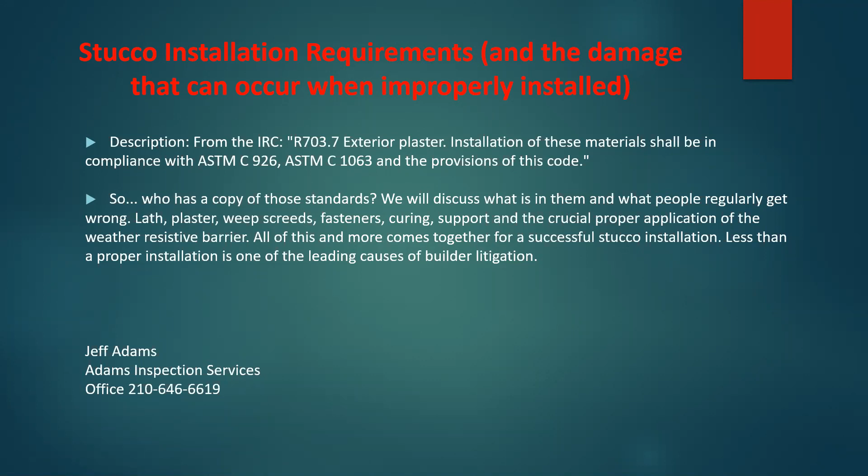There's 4 main types of stucco that you're going to see around, and that's your hard coat stucco. It's generally a 2 to 3 coat stucco, depending on what the substrate is behind it. You can occasionally find what's called a Western 1 coat. It is a manufactured product. It doesn't really meet any type of code or standards as a 1 coat, but there is a deal out there using it. I found that being used in the New Braunfels area north of San Antonio. In Central Texas it's not used that much on residential, more on commercial. Other areas it was used quite a bit.

And then there's a modified stucco, which could just run the gamut. It might have a styrofoam board backing like what you'd see with EIFS, but then they put a hard coat stucco over it. They may put a 1 coat or 2 coat stucco application, and then a polymer top coat, such as Dryvit or what have you, over the top of that.

The manufactured, what I like to call just the lick and stick stone veneer that goes straight over the stucco. And then there's a new one coming up that I just really hate. Several builders are using it. I just call it a faux stucco. It's made, it's an LP product. It goes over their panel, which originally started as their smart panel, a smart siding, and now it's that strand board or whatever they call it, they're putting it over. It's taped at the seams, and then they put a polymer coat over the top of it, and it's just got all kinds of problems. That product can't touch the masonry veneer at the wainscot, which it does. It can't touch the slab and so forth, and we're not going to go into that, but there's just all kinds of issues with the install with that as well.

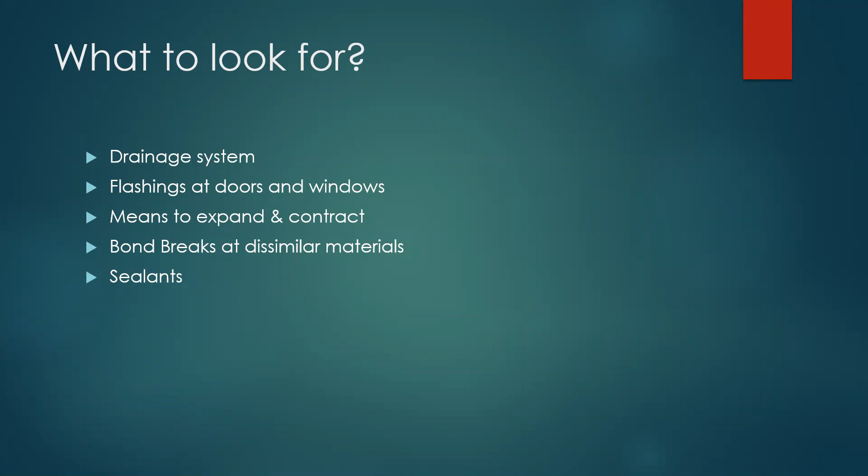Elastomeric paints - every builder around says, well, we paint our house with elastomeric paints. So they're basically putting a condom over their house. It does not breathe, and it typically will rot that out prematurely. I might have some pictures of a house that was done with partial elastomeric, and I'll have to look and see if it's in here.

It traps moisture. I go to these houses a few years old, there's a big water balloon sticking out of the wall. I can pop it with a knife and the water comes pouring out. It traps moisture in there because it's not going to make a perfect seal at doors or windows. Elastomeric paints just cannot be used in lieu of proper flashing details.

In general, it's got issues with the perm rating, and down here I just don't feel it has enough permeability. I'd rather use a name brand product - this is not an endorsement for Dryvit by any means, or several others - but a name brand product with a polymer top coat has a much better perm rating and allows the house to breathe.

Obviously, we've sized our ACs properly to help take care of some of the vapor. Hold on, what'd you just say? Whoa, I know, but I didn't hear you correctly, because I know you didn't just say we've sized our ACs properly.

No, we should be sizing our ACs properly. A good AC guy will, because we have to accommodate for water vapor in our houses down here. Other areas, elastomeric is probably going to be all right, but in this region of the state, we need to breathe. Everything is about breathing down here, and we have to allow our houses to breathe. Ideally, our AC should be sized and designed properly for the region it's put in to help accommodate for it. And I know it's not.

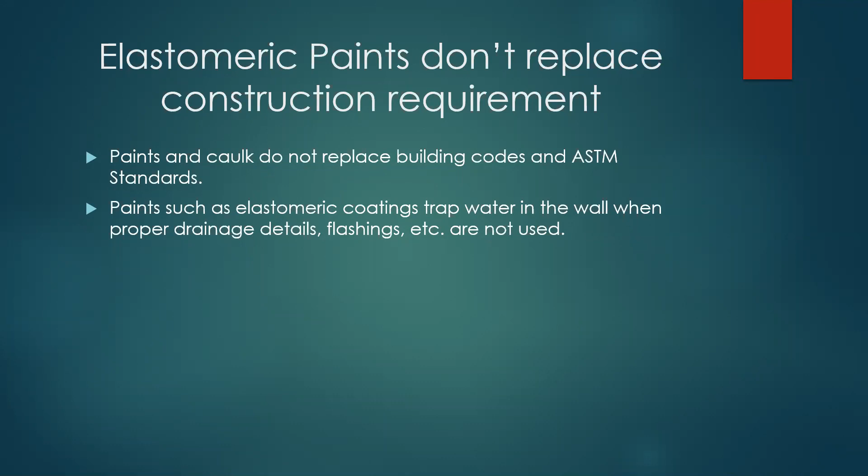I know Jason and I talk about this all the time, about all the returns being undersized and improperly ducted, and rooms with no means of return, whether it's a jumper duct or some type of bypass. I just did one yesterday, 4 supply vents into a master bedroom and no return on a 2-story, no way to get it in there. So you're going to have to cut a hole through the wall and put in a pass-through grill. You can't have 4 supplies into a room like this and no return. You're going to have to cut 12, 13 inches off the bottom of the door to make this work.

So here's the standards, a good little cheat sheet. I actually print this out because I can't always remember all this stuff, although I'm pretty good at remembering these codes every now and then - I need a little bit of help. So it gets into a little bit with the IRC.

We start with the flashings, exterior plaster. We get into lath, a little more into plaster, your weep screed, which is defined by a 3.5-inch flashing detail. A casing bead is not a weep screed - the holes, as you're going to see, are not designed to let water out. I'll show you how a weep screed is supposed to work and how it actually works.

Obviously our WRBs have to be good weather-resistant barriers. We keep changing the name - moisture barrier, and so forth - and now the newest term they like to use is water-resistive barrier. So your WRB's got to be in there.

What about that cheap perforated builder wrap? That's good stuff, right? I'm a big fan of Tyvek. When you look at these house wraps, I tell people everything you ever heard about house wraps being horrible is true, with the exception of Tyvek. The engineering that goes into it is different. Some of this other stuff that's off-labeled, labeled in the builder's name, is no more than a woven feed sack - there's holes in it everywhere. It's not doing anything to stop the water at all, much less vapor. It's just not doing anything.

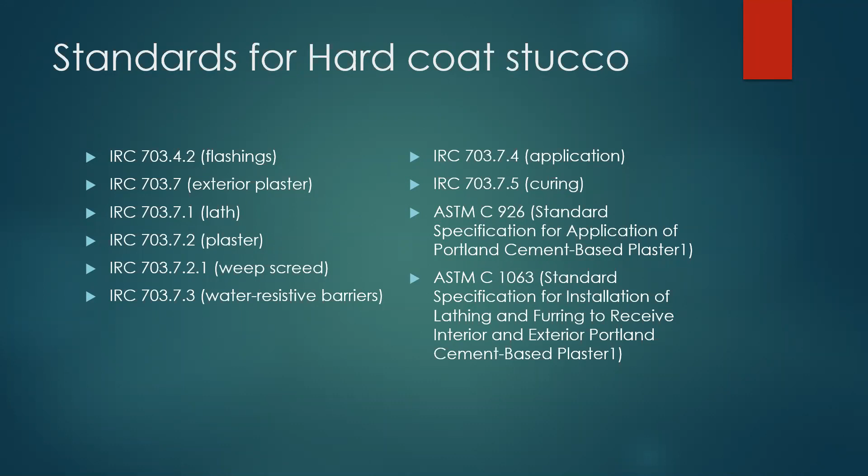It's usually very subtle wording in there that gets changed, but every few years, obviously, they become like the code, and there's enough changes where you have to buy new chapters. I split them with some guys - for an extra $10, you get 3 copies. So there's 3 of us together, and we split them up like that, and it's pretty cheap to buy them.

Flashing - so this one is a little bit quite interesting. When you start looking at the flashing, you start looking at the ASTM standards, we can't confuse window flashing for stucco flashing. Those are 2 separate codes.

So all the time you're going to see the lick and stick flashing details up there, and that does meet the ASTM standards. That does not meet the code requirements for stucco. Stucco still requires its own flashing details you're going to see.

Under 703.4.2, and they keep bouncing that around. It was 703.8, it was 703.5. Right now I think it's still at 703.4.2.

Intersections of chimneys or other masonry constructions with frame or stucco walls with projecting lips on both sides under the stucco copings. So when you start looking at all these stucco houses with decorative bands, they are requiring flashing details in the code. So it's not just the ASTM standards, it's also in the code when you start getting these decorative bands. At least in the South Central Texas region, you're going to see here in a little bit, almost all the decorative bands are being done wrong.

That's why a lot of other stucco experts feel decorative bands are a horrible idea. I think decorative bands are fine when they're done right, but I would agree that decorative bands are a horrible idea with the way that we tend to build them in this region of the state.

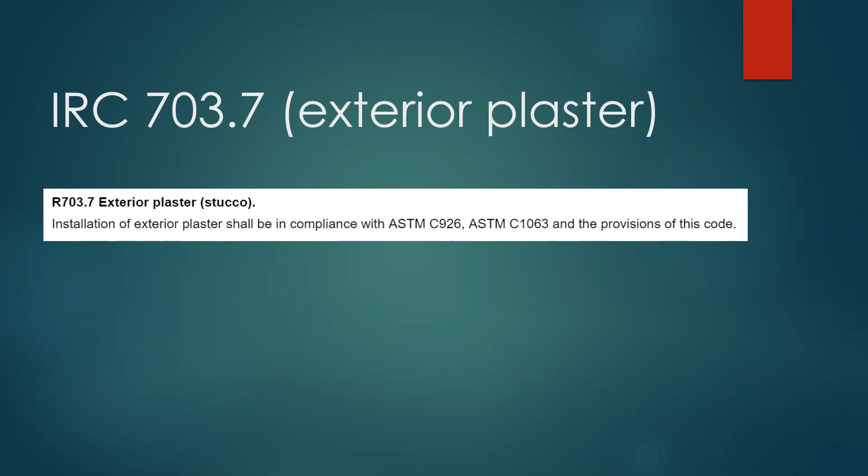Exactly how it has to be attached, the attachment. I don't get as concerned. It's kind of like anything else. If there's some areas that are randomly improperly attached, it's not going to hurt anything. Whole large sections, obviously it will. It causes it to buckle under its own weight in some instances, causing a lot of cracking and damage that should not be occurring, and that's because the lath is pulling loose.

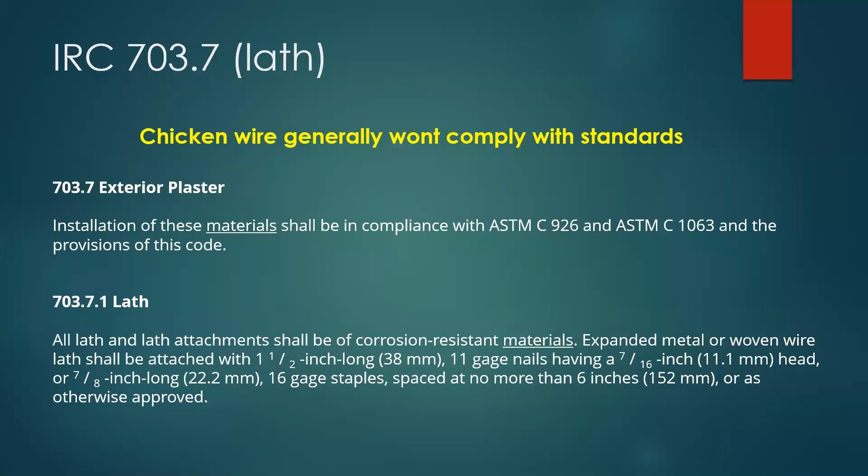And so there's your standards under 703.7.2. It gives you standards: no less than 3 coats over metal lath or wire, shall be not less than 2 coats when applied over masonry, concrete, pressure preservative treated wood, or decay resistant wood, or gypsum.

You still will see some gypsum. It's still used. I'm not a big fan of gypsum, but as long as it meets those ASTM standards with a waxy coating on there, it does suffice to be used, and it does also equal one of your WRBs. It can be used.

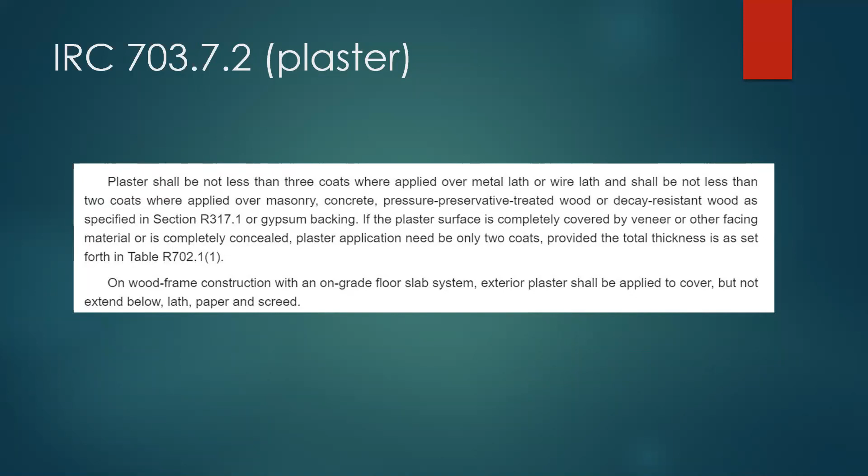The reason I don't like it is those staples do not have a good pull out. They can pull back out much easier than they can going through OSB or plywood or anything like that. Where it obviously hits the studs, not a big issue. If it's put on over a plywood substrate and these long enough staples, then it's kind of irrelevant. I still prefer Tyvek or even Zip. Zip is a big one, and you're going to see a lot of Zip stuff coming up.

The weep screed, this is a big one. So weep screed has been in there, and you can go all the way back to CABO and Southern Building Code. It didn't go into this kind of detail, but like I tell people, weep screed has been around in the code since Christ was in diapers. It is literally that old.

The ASTM standards, I've been doing this 30 years. It's been in there. Back then we used CABO in the Southern Building Code. It just referenced a screed. It didn't go into the 3.5-inch flashing detail like it does now. But when you got to the ASTM standards, it still defined the screed as what we have now.

So the idea of the weep screed has not changed much over the last 30 years and possibly even over the last 40 years, even though you could not even buy it in the San Antonio market here until about, I don't know, it started becoming available around 5-6 years ago. Prior to that, you had to special order it and wait for it to come in. They didn't even stock it at the supply houses here. Oh, they still don't at Home Depot.

Go back to that last slide real quick, Jeff. And I can guarantee you one thing we never see that we just... if you use your back arrow, it'll go. There we go. Hey, what about this?

The weep screed shall be placed not less than 4 inches above the earth. We are normally okay at that, but think about stucco on back porches. I've seen it on porches where it's just going to get hammered with water. What does the stucco do at a porch? It goes all the way down to the concrete. Yep, and we're going to cover that. Drain? How's that going to drain?

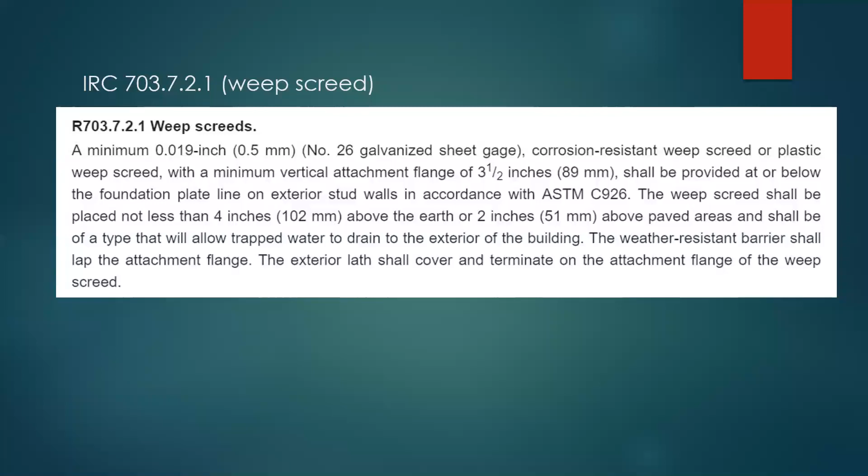Here's one of the other big issues too that you see - these outdoor kitchens. Some of the builders have gotten smart and started using CMU block to build these and stucco them, but the ones doing wood are just putting them straight down on the porch. The stucco comes down to it, and within a few years these outdoor kitchens are completely rotted out because it leaks up around the granite countertop. It runs down the backside of the stucco, gets the OSB wet, pops it all loose, gets down to the toe plate, and it just completely rotted out a $30,000 outdoor kitchen.

The water resistant barriers - again, stucco is one of these that does need 2 layers of moisture barrier. I personally feel that the way the engineer submitted the moisture barrier has to be done at the sill flashings or pan flashings is completely wrong. The builders I work with, when I write repair protocols, I've worked with Stephen Cook Engineering and stuff on some stucco projects, and I actually draw it a little bit differently. I don't let my sill flashings terminate between the layers. I want to keep as much water on that second layer of moisture barrier as humanly possible. It just prevents us from having issues down the road.

It's no different than a tile roof - if you can keep 99% of the water on top of that tile rather than getting underneath it, you're going to have a much better roof structure. At one point I was doing a mediation, and one of the tile manufacturers testified that their barrel tile was all right to have as much as 30% of the water underneath it. I almost died, I went, oh my God. Very difficult - if we let 30% of our water get between our moisture barriers, we're going to have problems. We need to make sure we keep as much water up on those moisture barriers that gets behind the plaster as humanly possible.

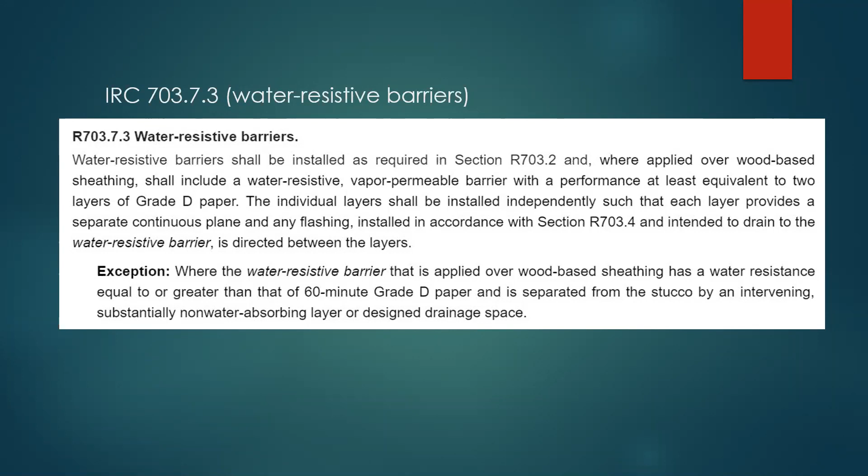The application - each coat shall be kept in a moist condition for at least 48 hours. I know every one of you guys out there doing inspections drive by and see these guys out there with a garden hose misting their stucco for 48 hours between the coats.

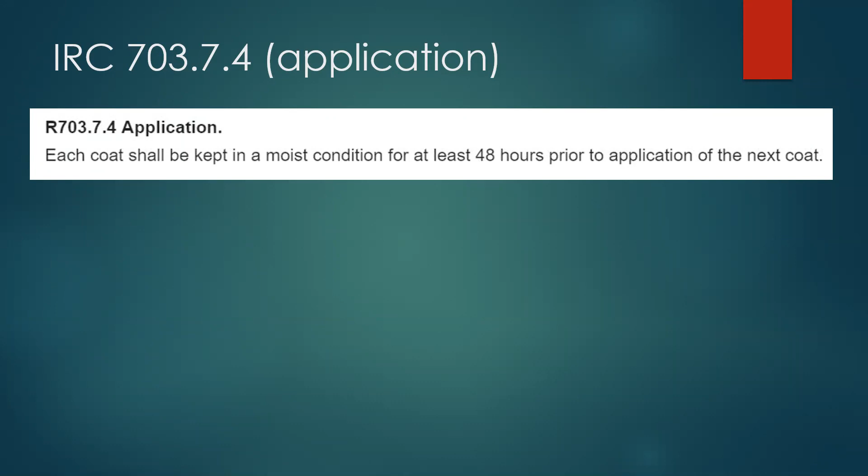That's part of what's causing a lot of the cracking that you see. They're just coming back and reapplying the next coat the next day, which you're not allowed to do, and they do it anyways.

The finish coat for a 2-coat cement plaster shall not be applied sooner than 7 days after the application. They'll put up an application today and be out there putting the next application tomorrow, not allowing enough curing time, causing a lot of cracking. I see at least 2 days sometimes, but it says 7, folks. It says 7.

Occasionally they don't show up the next day because they got paid. It depends on what day it is - if it's a Monday, they'll be back on Tuesday doing it. The best thing is to have it applied at least on a Friday.

Here is your ASTM C1063, ASTM C926 standards, and here's what's really important: stucco is the only material that requires a specifier and a contract. A specifier must design the stucco with drawings and details, then a contract must be put together between the stucco applicator and the builder.

I use that in court all the time. When they always want to argue, I just tell the attorney, ask them for their stucco contract. And the other side always responds, 'what stucco contract? What are you talking about?' You got to have a stucco contract - you're applying this product with no contract.

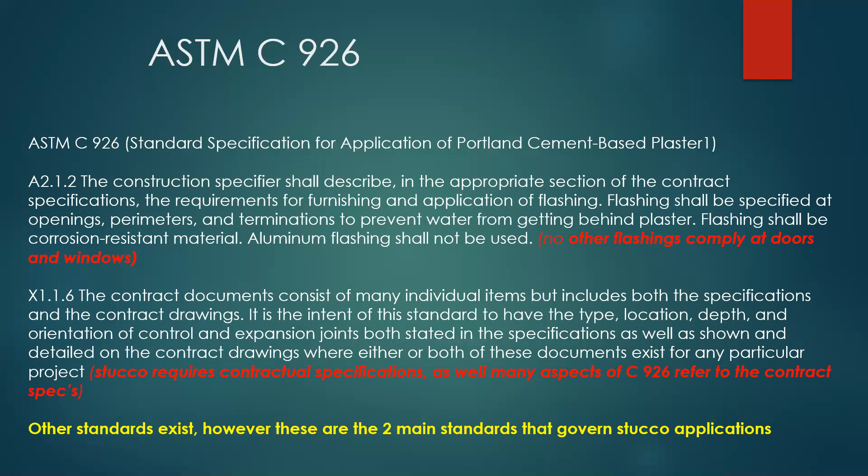So you see all these houses, and the builder or even the architect goes, 'oh, well it doesn't look good with those expansion joints there.' And I go, 'yeah, well neither does that big damn diagonal crack with water oozing out of it with green algae.' It does require expansion or control joints at every single penetration through that stucco.

Standards for the lath and furring to receive interior and exterior Portland cement. Separation shall be provided where plaster abuts dissimilar construction materials.

So again, you cannot butter that vinyl window with stucco, which they all do. It is required to have a bond break with at least a 1/4 inch gap so that it can be sealed.

Especially with these vinyl windows, as that concrete expands and contracts, it puts a lot of pressure on those vinyl windows, which are never installed properly either, causing a lot of distortion in windows that don't open and close, and a lot of egress issues. These houses get a few years old, materials expand and contract, and then we end up with windows that don't work and have egress issues on a regular basis once they get a few years old.

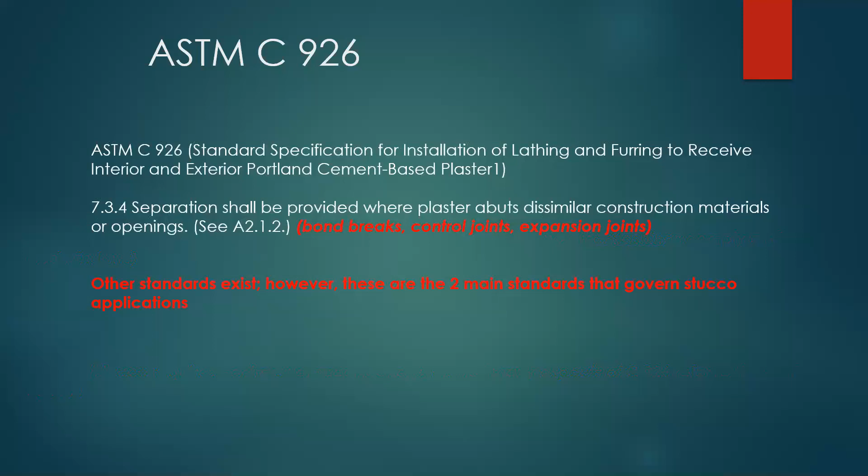I plagiarize these, I love these. This is a company called Senergy, and they've got great drawing details. This one shows you a drain mat in there, rain screen, which Tyvek has a good product. There's several really good ones out there. I like this company's product as well, their rain screen. But Senergy is a great place to go and look at some of these details.

There is talk that there's a big push to make rain screen a requirement on stucco. On one hand, I'm all for it. On the other hand, I'm thinking, well, what are we going to do by adding one more layer to this? If we can't get the layers right that we already have, adding another layer is going to make it worse.

I worked on the project with the Stinson Airport Control Tower here in San Antonio. I was the inspector for the engineering firms, as well as TxDOT and the FAA. It had a stucco wainscoting around that control tower, and with that, it had a rain screen built into it. It was a great drainage mat, and I really liked the product that was spec'd on there.

And we could not find anyone in the San Antonio market that could put it on. We had to go to Houston and bring in a commercial stucco contractor, pay him three times as much in order to do that little bitty amount of stucco around that control tower, because no one in the San Antonio market could put it on.

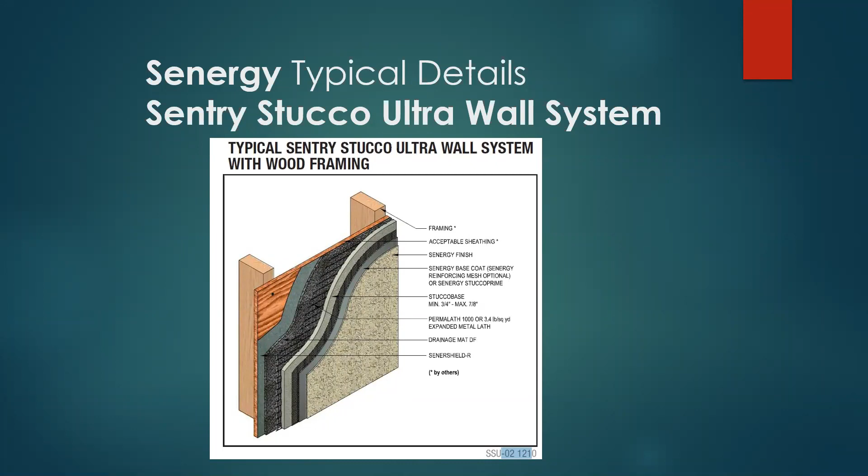This here is showing your horizontal expansion joints or control joints, how they're going to work. You've got to have them between the first floor and second floor so that it allows for that thermal expansion. You must have expansion joints installed between floors. You're going to have difference of temperature, and you're going to have different amounts of expansion and contraction.

You will often see these joints missing. Let me ask you, so what about, does it just say between floors? What about, I can just imagine a 20-foot plate in a great room. Isn't there like, is it a 10-foot max?

Yeah, there is some detail for that. And then they've also changed it. It used to be a 2-to-1 ratio between these joints. They've now changed it to 2.5-to-1 ratio. So when you see these big tall walls and they've got these expansion joints, you may have to come back, even though it doesn't have a floor there. A lot of those are going to require a horizontal expansion joint to divide that wall up even further.

Gotcha. And while we're on this, Kelly asked, when referring to flashing around windows, are you considering self-adhered flashings as acceptable behind stucco, or saying it's got to be metal to come outside of the window frame? It has to come outside the window. It specifically says to prevent water from draining behind the plaster.

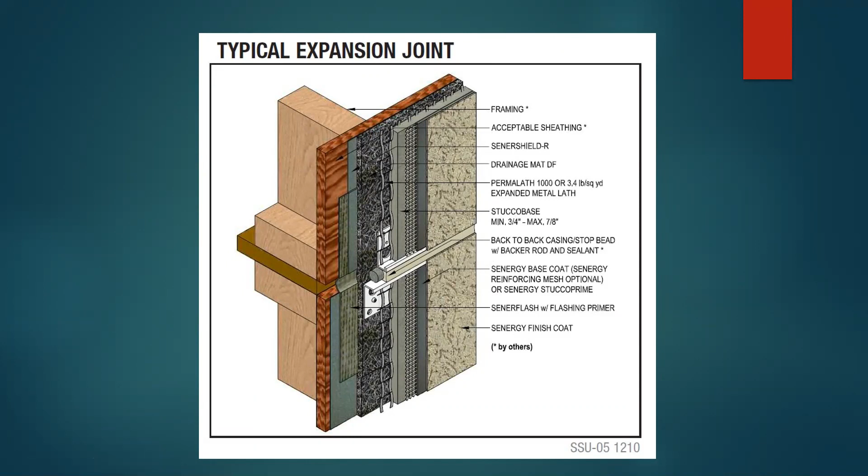Here's your bond breaks. So you're seeing a window frame, you're seeing your casing bead here. We're leaving a gap between here, okay, generally a quarter inch. You'll see that's often referred to as an embedded caulk joint, okay? So we have our casing bead here, we have our window here, we're adding our backer rod, and then here is our sealant.

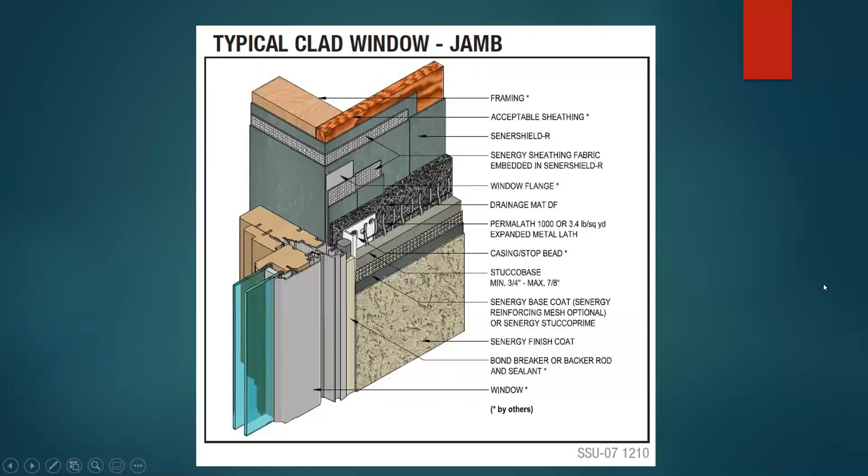And it's giving us that embedded caulk joint that allows for this expansion and contraction of dissimilar materials. And again, the idea, folks, is not to keep this stuff dry. I mean, yeah, we do want to keep it dry, but the idea is we know it's going to get wet—where's the water going to go when it does?

I love this drainage mat product. I mean, if I were going to do stucco on my own house, no brainer. Well, and they have it—I've done it twice now.

James Hardie has their own product, and then there's another company that did it. That's for James Hardie, and you can do it behind fiber cement siding. It's pretty cool, it's a great way to do it, and it adds a little more energy efficiency because you have a little bit of air movement in there to help stop that thermal bridging between the siding and the wall.

Here you can see your detail. Now this is an in-depth detail here, a lot more complicated than actually what the code requires, but I like it again. So you can see everything here. Here is your flashings—they put a drip leg on here. They ended this with a casing bead.

I would not recommend ending this with a casing bead, because it will hold moisture here. It will ice dam, it will freeze. It can end just on this flashing here, okay, and that's fine as long as we don't caulk this edge. These casing beads will hold water and they will split and so forth.

One of the other problems you have is all these guys will nail it with a staple gun too low, and you're going to see that here in a little bit, and we've just ruined all our flashing details and caused it to leak. They're leaving a gap, as you can see, and putting in an embedded caulk joint underneath here. This is a very complicated window flashing detail, it's pretty cool.

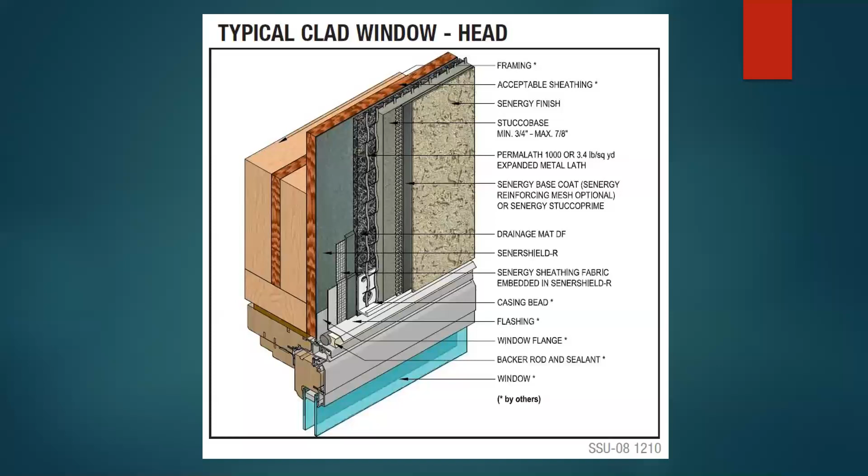I would not end it with a casing bead, but that's how they choose to do it. Down here it's not going to really hurt a whole lot, but as you start going further north, it can ice dam and split. I would never do that. There's no reason with all the other details they have there. It's just an extra detail that's not needed.

This is an exact color copy of what it shows you in the ASTM standards on how to do your deco bands, any decorative bands. We're getting this wrong, folks. Y'all watch these, your next inspections, watch these decorative bands. The other problem you have is when they do these decorative bands, you're going to see they're shooting holes all through our flashing. So even if we have good sill and head flashings, we are blowing holes through them.

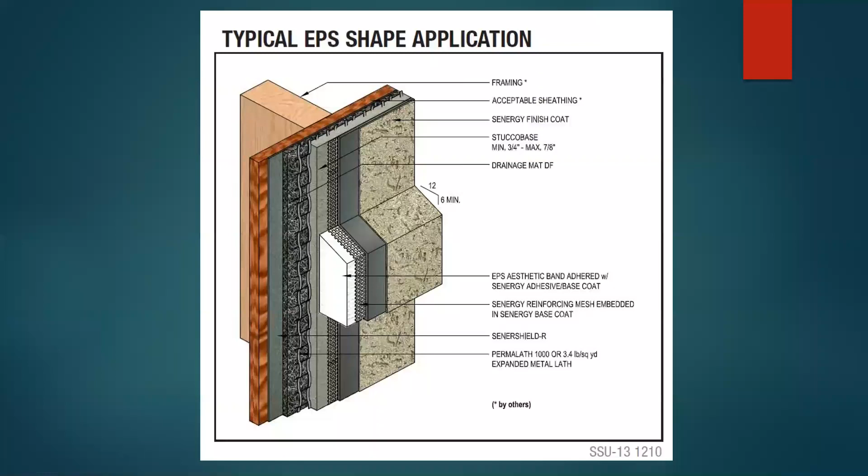This is actually going on here and going back behind the moisture barrier and has a wrap on it. And when you do this, you can see how these decorative bands are going to work just fine. They're going to work great.

Does EFS have to meet ASTM or EIFS? I call it EFS. Does EIFS have to meet ASTM C 926 as well regarding drawings and contracts?

So I know Oklahoma has had a problem with the base coat, maybe Kelly could elaborate a little bit. So basically the base coat's cheaper from one manufacturer, and then they got something from another manufacturer, and it's voiding the warranty because it's not the same product, and they're having a real problem with that in Oklahoma. And it's because, I just don't understand, the supplier doesn't know better. That's what bothers me. But this is all about saving money.

It's just like the CEO for the major home builder saying, what? I build 7,000 houses a year. Basically, I am not about to spend $200 to solve this problem, if they can save the money. But you're exactly right, some of these products are not compatible, and you have to watch that.

So there is a big issue, I guarantee you there is an ASTM standard on that. I do not know what it is. We just don't use it enough down here, except on a few commercial buildings. So whenever I do run into it, I have to fully research everything.

And then again, the manufacturers a lot of times are going to supersede some of the stuff, because every bit of the code says the manufacturer must comply with the standards and the manufacturer specification. So like I tell people, if that manufacturer tells you to take that 50-gallon water heater and lay it on its side to install it, that's how you do it. That's how they got that product approved. So you have to look, it's very specific on some of those EFS from the manufacturer.

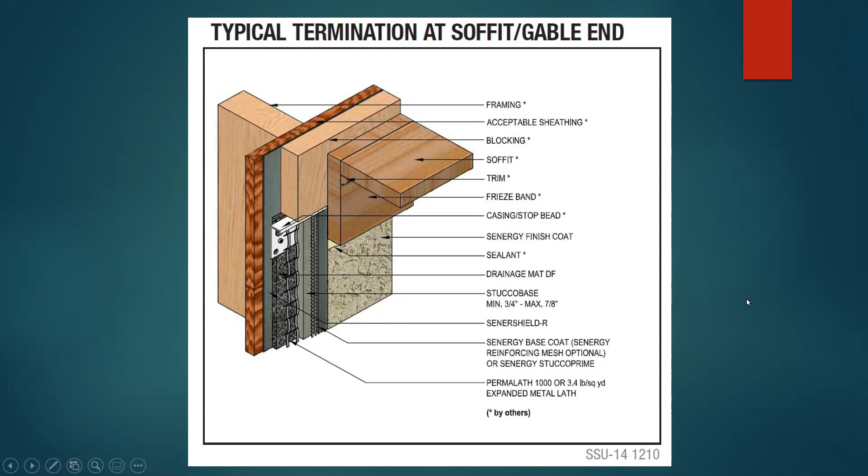This is just showing you how to terminate up underneath with a soffit. This is again, in my opinion, way too complicated. It does require a bond break here. Now, they did not leave a gap, and they really should have. A bond break would have required a gap along this edge to create an embedded caulk joint. I don't sweat it, especially if there's a fiber cement siding soffit underneath there. If they butt it all the way up to it, it's up underneath the eaves. I have bigger issues than that, but theoretically we are required to have a bond break and so forth here. They don't show it on this one.

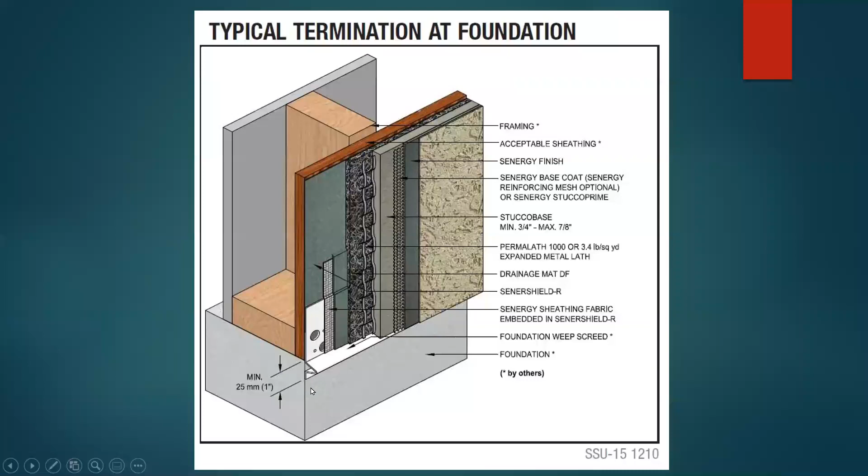And it's something that's so easy to not have. It's critical that all of this comes down. And then if we're using standard Tyvek, or if we're using zip and we're using a zip tape, that tape has to come down here to the bottom. We got to cover these holes, okay? It's got to be covered, and this thing has to overhang 1 inch. But truly, when you use a traditional foundation weep screed, you're going to get 1.5 inch to 2 inch overhang past, okay, when it's installed properly.

We need that overhang to prevent water from getting up underneath there. And I don't care if it's James Hardie - all the time I look underneath these houses and the guy overhung the James Hardie siding only 1/2 inch. I'm not picking on James Hardie, I love James Hardie, I talk with a rep on a regular basis, have it on my house, so I like a Hardie product. But again, if you only overhang it 1/2 inch, you can't stop the water from getting in there, and we have a problem.

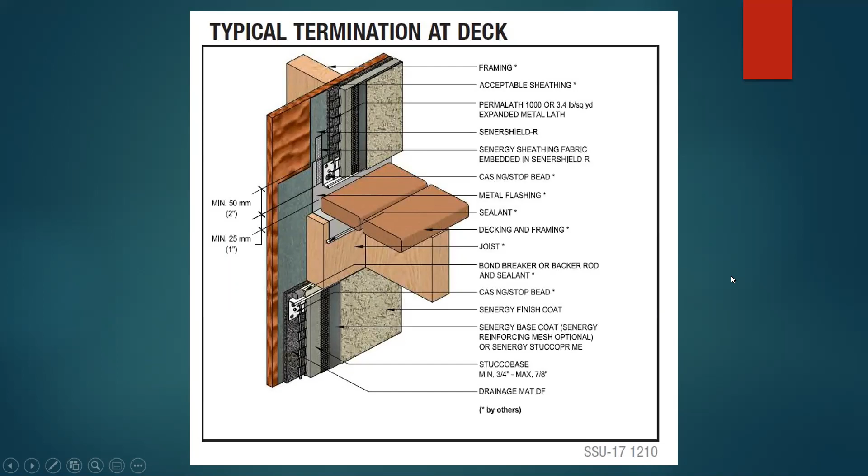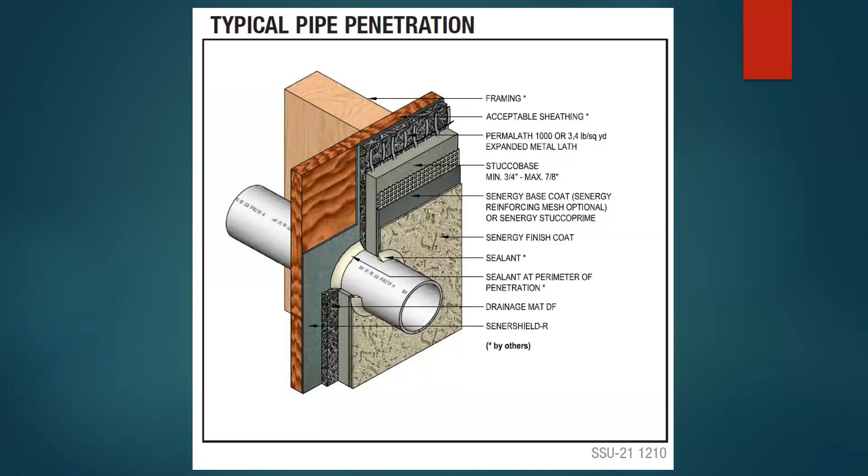Here they're showing how it's got to be flashed. They're showing more of like a sealant, but it's got to have a flashing detail. I love these new diaphragm flashing boots that are out there where you tape 3 sides - they've got them for electrical outlets. I love those flashing details. I think they've come down in price, but they were $30 a whack, so builders weren't buying them. But they are the greatest way to flash our penetrations. I don't care if we've got brick, Hardie, wood, or stucco - it's the greatest way to flash a penetration through something.

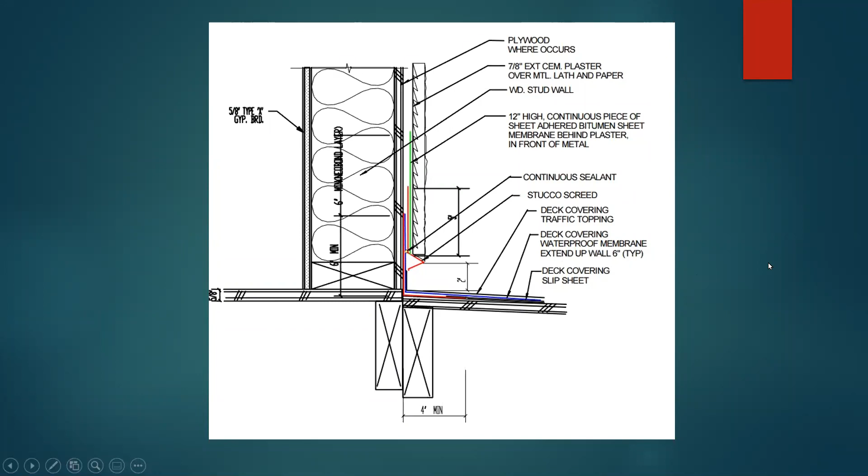This is the other way to do it. As long as this comes up 3.5 inches, and as long as we don't seal this, it's going to do the same thing, okay? Now, they're not getting this behind our moisture barrier, but you'll see this a lot with metal roofs or tile roofs. This is going to work just fine, here's our vapor retarder, as long as we don't caulk or seal this edge, okay? The water's going to get in here, and it can still weep out of this, okay, but it must have a 3.5 inch flashing detail.

Usually they're only going up the wall 1.5 to 2 inches, okay? It's got to go up 3.5 inches in order for this to work right. But this will work just fine to finish a wall off without having that. Ideally, I'd prefer to have that 45-degree angle, but I don't, so it is what it is.

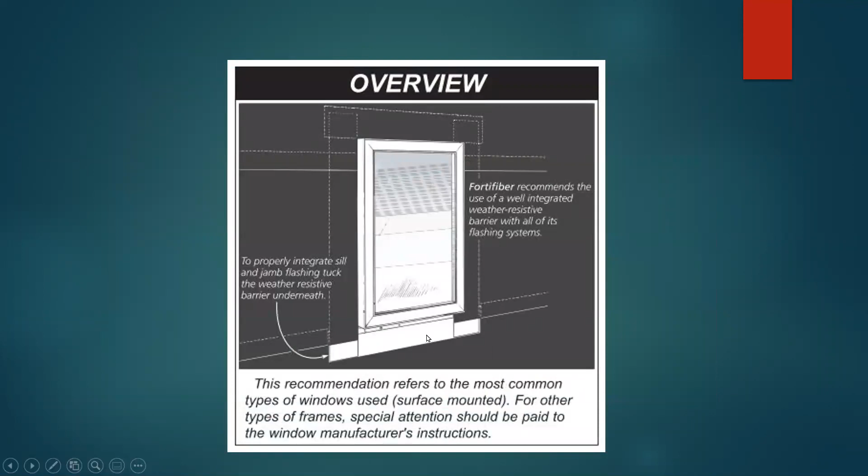And maybe one day I'll get around to submitting a code change. I think everything needs to stay in a shingle fashion and keep the water up on the top surface as much as humanly possible. The more you dig into the codes, the more you realize that there are mistakes throughout.

I know Dean at MLaw, he designs it to go in between there because that's what the code says - as long as our weep screed is all right, it works. I disagree with that. That's the only one - him and I pretty much agree on everything except that particular item. So if I design it, I'm keeping it on top.

But you did say, go back to that one real quick. Oh sorry, maybe I misheard, but you said if it's flashed, you can bring the stucco all the way down to that brick. Oh yeah, yeah, but it's got to have the flashing.

Now what I did, and I didn't take a picture of it, I should have. I've got a house here, only 2 or 3 years old, had very minimal water damage, but it's been leaking since day one. We're just wrapping that up, another very expensive one. What we did is used FortiFlash, a rolled-out plastic reinforced material like brick flash. We put it all up in here and terminate it underneath with our weep holes.

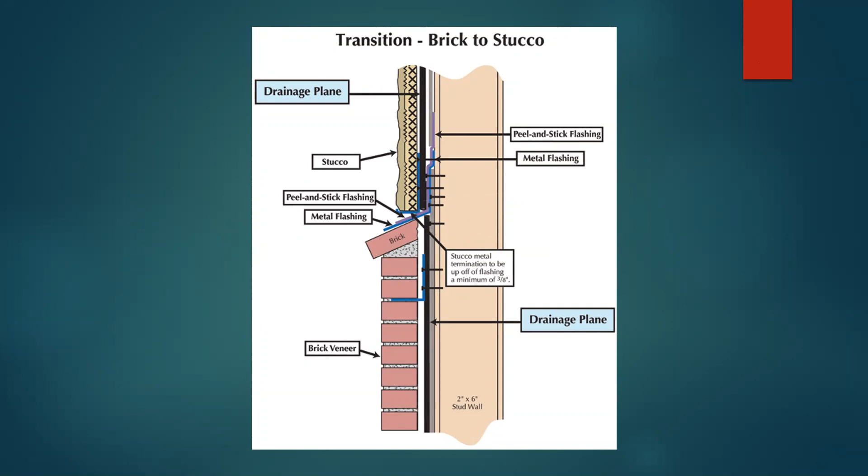The first thing the builder says, because they don't want to do it, is 'it's going to look like crap if we do that.' And I go, okay, well let's just bring that flashing down here and terminate it underneath, which is what they show you inside the code book for brick anyways. And so that's what we did, and now we don't have any nasty looking flashing.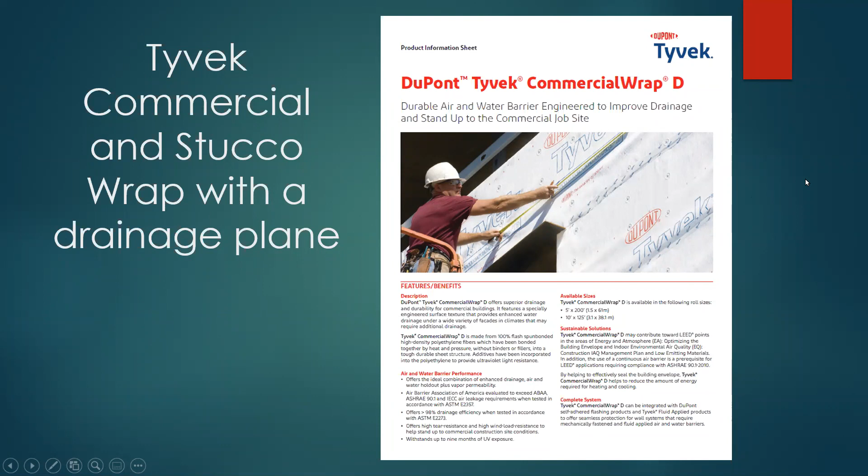Tyvek, one of my favorites is the commercial wrap or stucco wrap because it's got the drainage grooves in there. Again, I like Zip too. I do some stuff with Zip, but I do a lot more with Tyvek because it's easier to do. People don't want to go through and rip out their OSB except where it's rotted, so we're typically going to make our repairs when we tear the windows out and redo everything with the Tyvek. Everything I specify is commercial wrap or the stucco wrap.

Again, a little more of the Tyvek details of how they're to go on. This is their rain screen product that they have out. You don't see it on residential, they do use it some on commercial. You're seeing some of the engineers requiring it on commercial buildings. Again, great idea, I love the idea. I'm just not convinced that we're smart enough to use it because we can't get these other layers right yet.

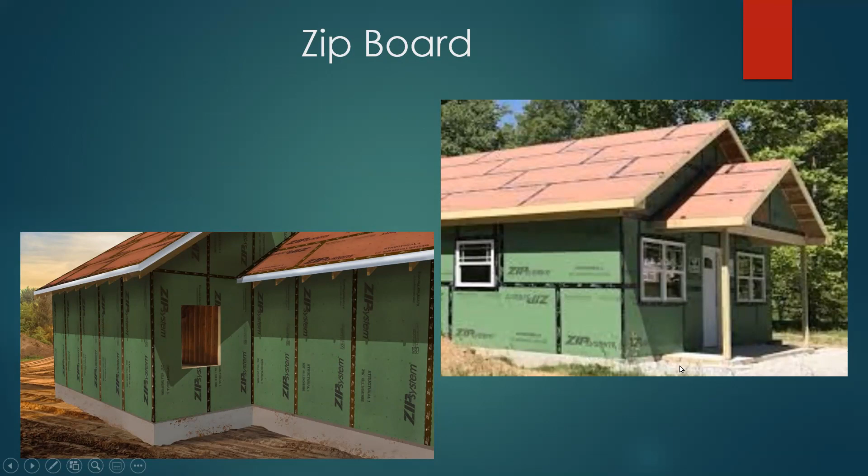Where I see an issue often is when we're getting into a lot of the board and batten, our moisture barrier is not overhanging. So anything gets behind the board and batten with James Hardie can get up underneath this edge. So what I'm having the builders do is run a piece of zip tape along this edge and then bring the board and batten down, and that solves that problem.

We put our Tyvek on, and then we put our whatever our material is going to be, whether it's Stucco or James Hardie, and then they come along and start punching all the holes for electrical, plumbing. None of it's flashed. And they come in on the inside and try to do it with some expanding foam, and it's not going to last.

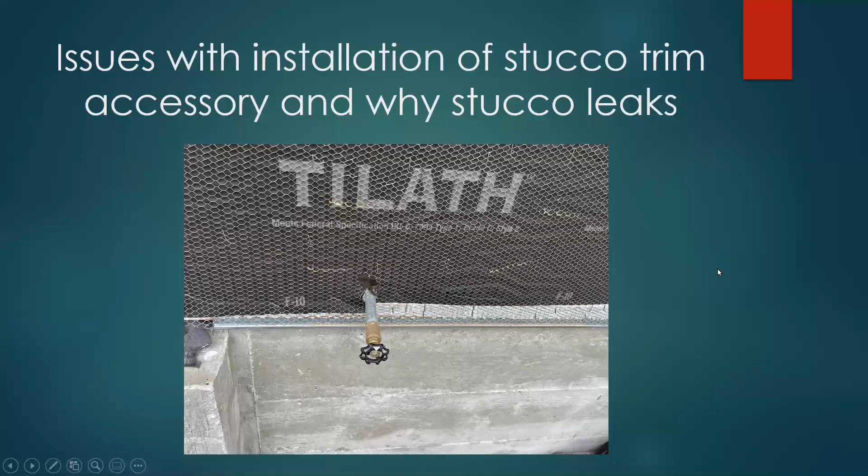What do you think about just a little pre-made metal or plastic pedestal that those go on? Those are fine, right? Yes, but most of these columns are too big for it. That's the problem you have, is the columns are too big for it. If they're small columns, then yes, those standoffs are fine. It's gonna work. Got a bigger column here, you have to form that up and pour it.

Now for you guys, I heard you say that you got some guys from Oklahoma. You could not do those standoff metal brackets on a smaller column because it's going to ice dam. That moisture is going to get underneath there and just tear that stucco up. So their only way to do it is with a pedestal. There's no other way that you're going to get that to do it.

Now there is a way that Dean submitted, and I don't have it in here, and I like this idea. I would not, at this point, do this, but to come back and retrofit something. What he did is he created a piece of flashing. If you can see my mouse, it comes down, it comes over 1 inch, and then it has a half-inch reglet.

So what you're doing is you're making a saw cut all the way around this, and you're using a urethane and filling it up, and then you're putting that in there. Your weep screed is actually a funny shape, and it's reglet in there and sealed to the concrete. And that would be my second way to do it.

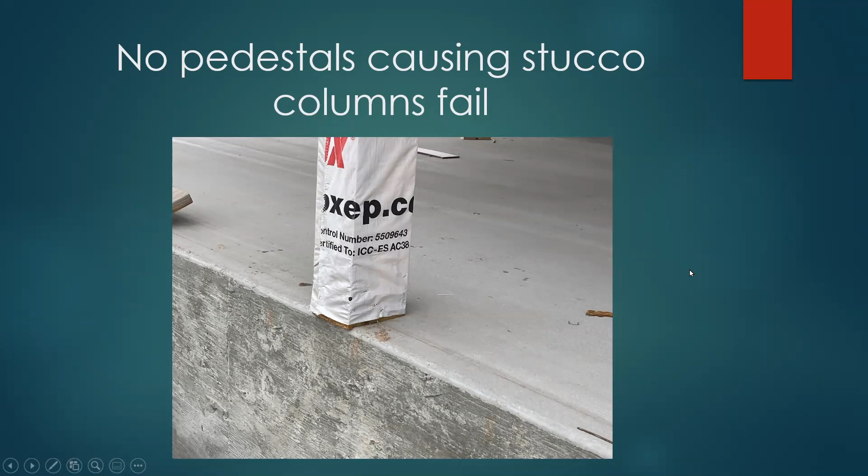Furthermore, you have to cut this. Before we put our control joint or expansion joint on, you have to cut the lath behind here. This is not cut. They're just nailing it over the top, and it will not work right. It does not control the expansion and contraction. Ruins the whole point.

I got a stucco guy in the Austin market, and I really liked what this guy did. He not only flashed everything with his Tyvek, then he cut his lath back away from here a little bit. And then he took and sealed every one of these penetrations to his paper.

They are flashed and sealed. And I thought, man, I really like this guy. He had a few screw-ups he had to fix, like missing the weep screed at the roof line, but overall he was very conscientious and somebody you could work with and train for the last few aspects that needed to get done.

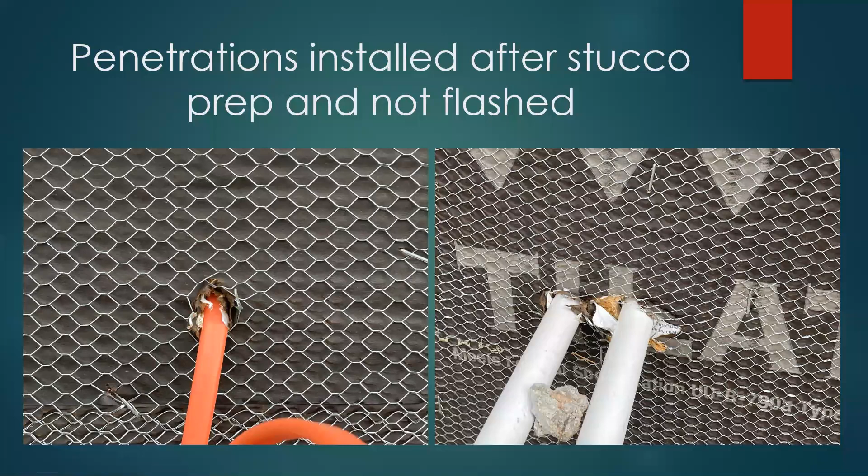But this is the way it is all the time, all over San Antonio. This is a situation where the builder said, 'Yeah, you're right, we're no longer doing it this way, take it easy on us.' And I told the attorney, he's lying. I drove over to one of his other neighborhoods and took these pictures the same day, just 30 minutes after he told us they no longer do it that way. How in the world is this going to ever work?

It's on top of the Tyvek. It's a casing bead, all the Tyvek short. Here's your toe plate line. They just hung this off of here with staples. This is still very much standard and is going to do nothing but leak and cause damage.

Required at all windows, or if you had like 3 in a row, could you just do the outside edge? Yeah, you typically are going to bank them. Yeah, you'd use a bank of windows.

I don't sweat this that much, to be honest with you. I'm more concerned that there's no head flashings here, no expansion joints, and no bond breaks. This is just going to leak.

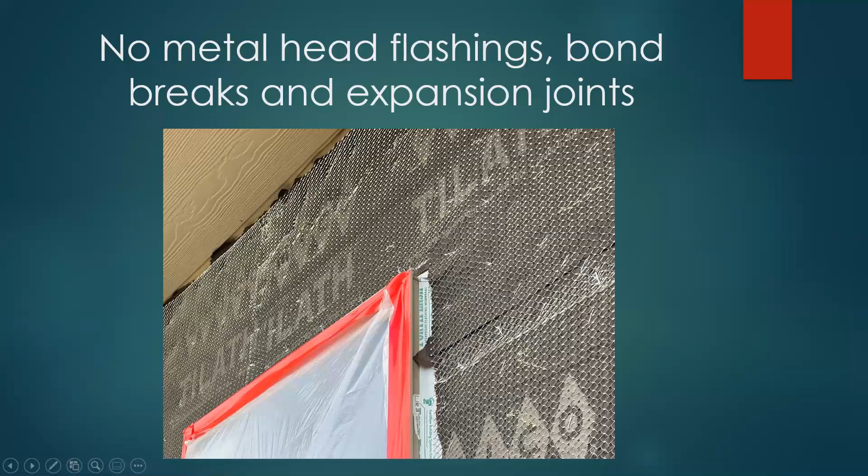Yeah, it's crucial. So this is the same window, right? Okay, I want you to look at this. Water's going to get in and travel down here, okay? It's going to run down here, and we've tucked our sill flashings in between our two layers of moisture barrier. Our weep screed is only under one layer of moisture barrier.

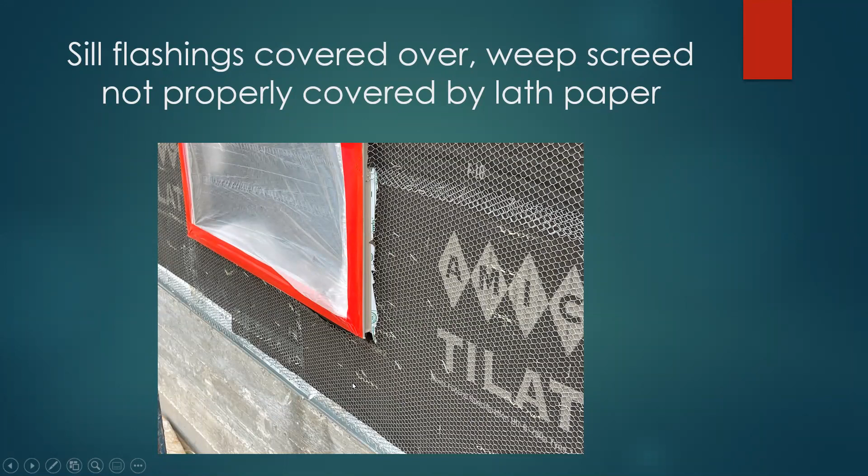This is a different one, but similar. Our moisture barrier stops at the toe plate, so what we're doing is literally forcing the water in under our toe plate all the time. It takes time, but it forces it directly underneath the toe plate, because every bit of this is wrong.

So here is showing you how this is wrong. As I do these inspections, I get a lot of calls to do them. This is your cheap green house wrap, okay? It is behind the weep screed. So again, where are we forcing the water? We're forcing the water up underneath this toe plate.

We're just forcing the water here. There's no real overhang, you can see all these fasteners have missed, they shot it with a staple gun too low. So this weep screed is not overhanging, but a half inch past the foundation, and moisture is going to get in. This is a new house, and moisture is going to get in.

Hey, there's my ugly face, didn't notice that. Moisture is going to get in underneath there. This is just not going to work right, it's not layered right. And eventually, you're going to see what's going to happen as these houses get just a few years on them.

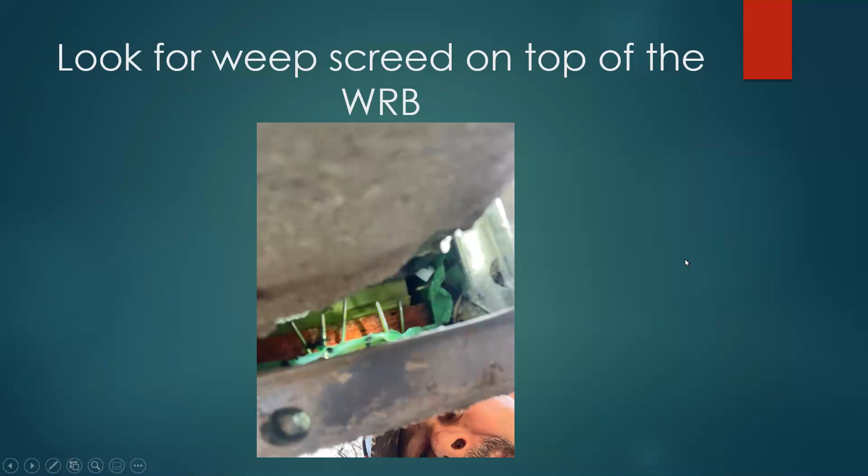I use the holes for this. You can't see it here, but the moisture barrier is done wrong. Here's what's really important about this: these holes would generally have stalactites in them. These holes are in here for air and drainage. This is a drip edge, this is where your water comes out. So whenever they use elastomeric or a polymer top coat, you cannot seal this.

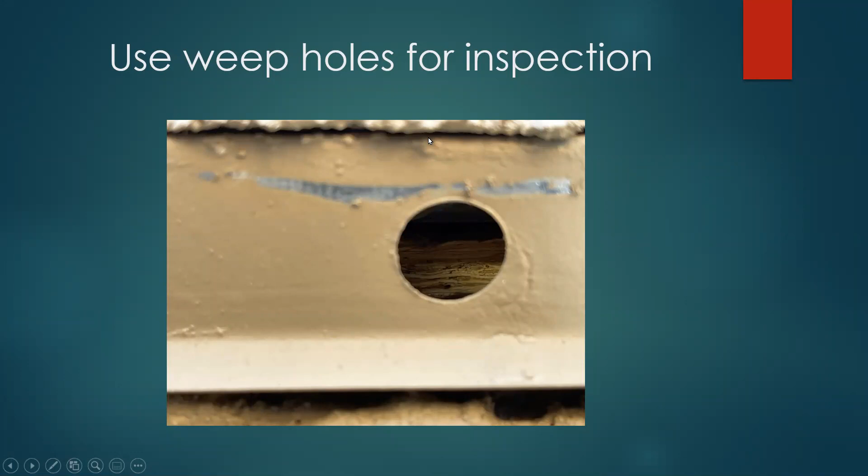I make them come back all the time with a razor knife and slit it, because they've sealed it and they're trapping water in there. This is where the water drips off. That 45-degree angle on that weep screed creates a drip edge, just like it does for your roof.

They do it all the time. I just did one the other day that was already sagging, a 20-year-old house, but sagging.

You'll find weep screeds that don't have holes. They don't have to have holes. You'll find a lot of them without that sometimes. This is how it works. This is how our system drains.

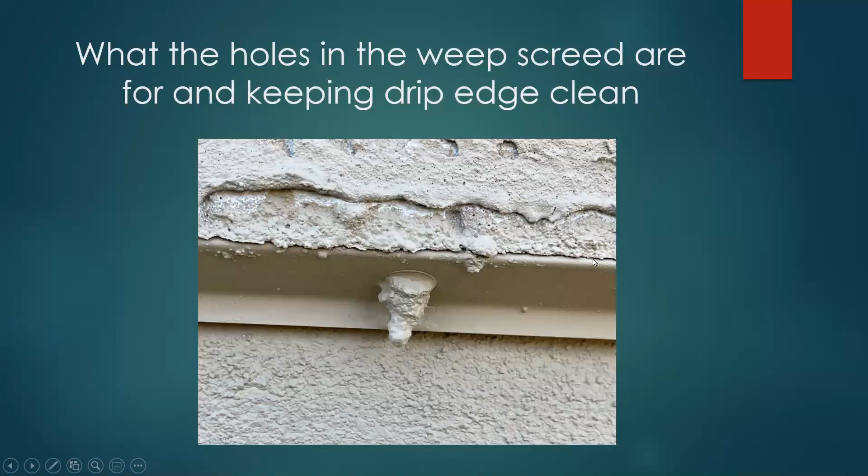I always thought all those holes were where the water comes out, but actually the water comes out through the gap between the stucco and the metal. It's going to drip off here.

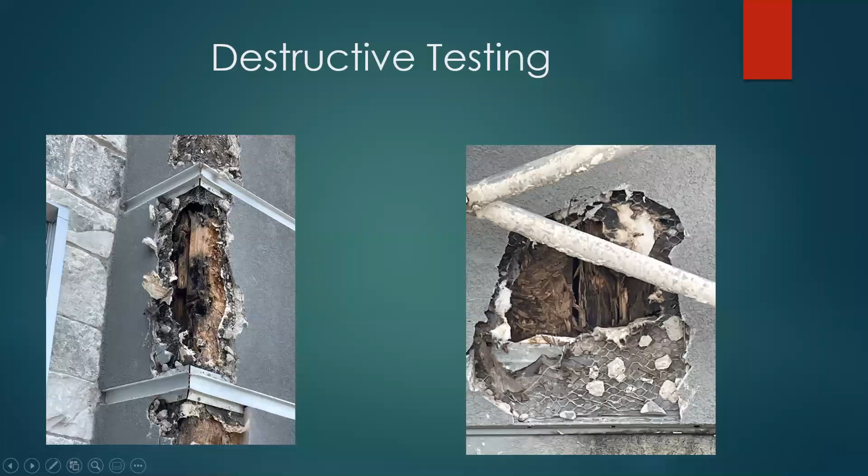Here they come, start cutting it open. You can see the amount of rot starting. Now we start tearing this open. It's completely rotted going into the studs. We are about to lose this front section of this house on a 3-year-old house.

Boerne is still on the 2006 energy code. That'll be a shame. But all the builders said that they're really tough up there. I always laugh, I say why don't you find out which code revision they're on?

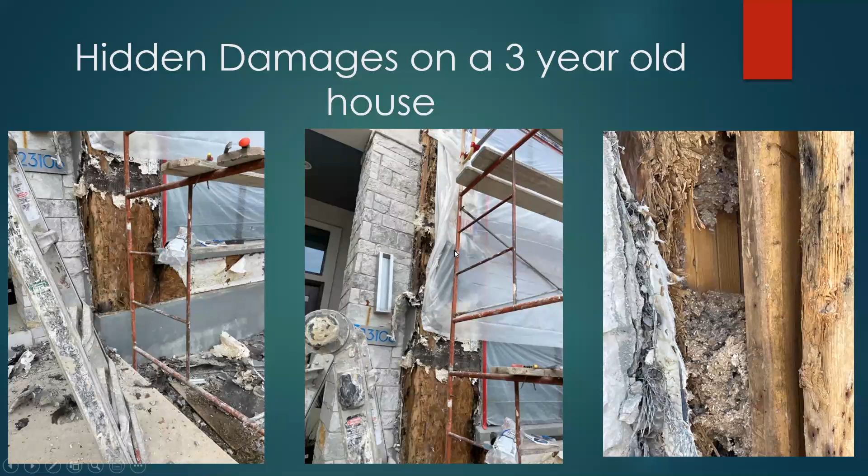This is just completely gone. These people ended up going with another expert after I started because I couldn't drop what I was doing. They called me Sunday night at 8 o'clock wanting me there to meet the builder the next morning at 9. I said I absolutely cannot, I stay busy a week to 2 at a time. I'll be glad to meet him out there, but I cannot do it right then. So they went with someone else. The builders convinced them only to fix this front part. I said okay, save my information.

Here it is, tearing it open. More pictures. This is so rotted up in here that we're going to lose the structural integrity of this section of the roof. This is all load bearing on this really high wall. Again, none of it was done right.

Another house, brown stains, this one up in the Bulverde area. Same builder, house after house after house. As of tomorrow I'll be on my 3rd house in a row in litigation against this builder.

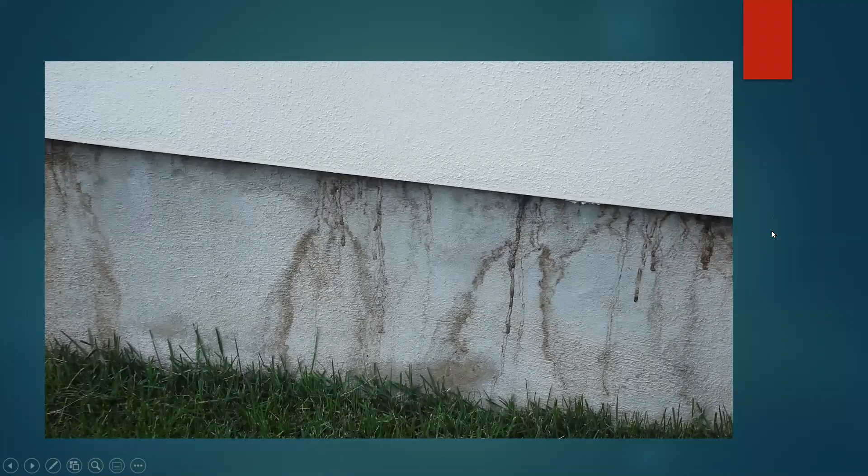Here is your lack of soffit detail. Look at all the water coming out of here. This was a commercial building that was 8 years old.

It was only 6,000 square feet, right out over there by Sonterra, an expensive area here in San Antonio. My client was buying. I've done a lot of work for this client, and I told him it would be $650,000 to fix the stucco. It was only 8 years old, only 6,000 square feet. I said it could go higher because I can't get to any of the walls on this one side.

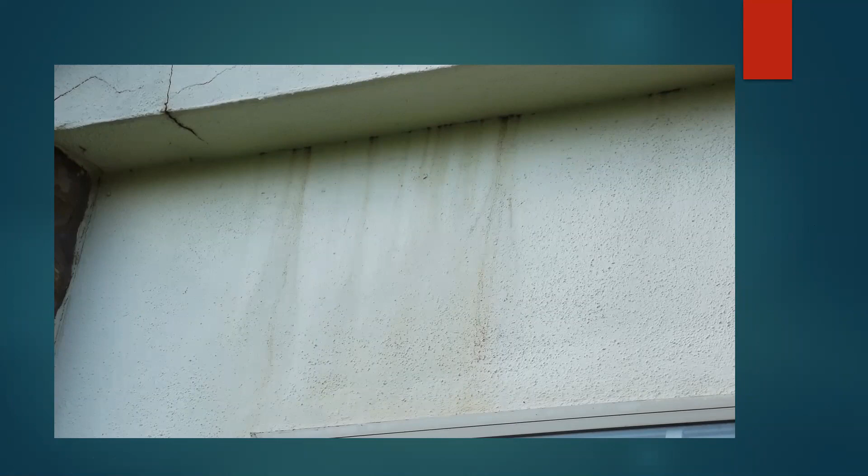The other space is 2 spaces, total of 6,000. I couldn't see anything on the one exterior wall over there. It came in at $850,000. The building was about to be completely gone. They had to just redo the entire building. $850,000 on a 6,000 square foot building, 8 years old.

This here, you can see your water issues. You can see where this is leaking at a window, obviously. So we're having these water issues here, leaking out.

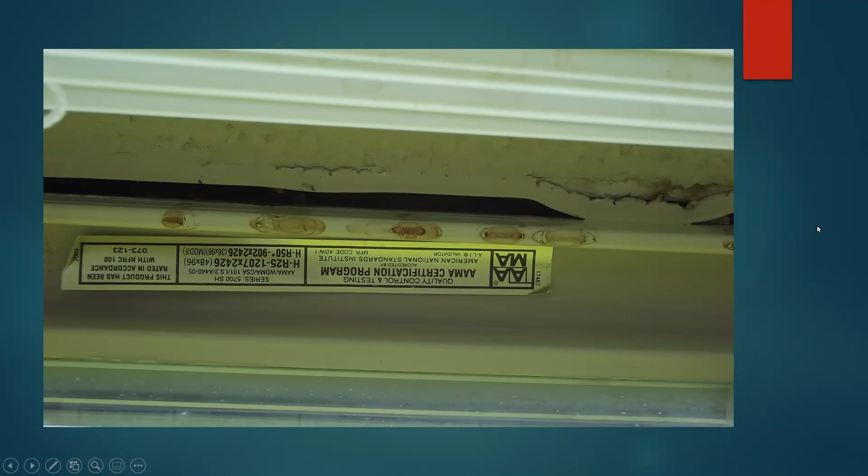And you can see this is just a nightmare. You can see all the staining here. When it stains like that, I about guarantee you that's all rotted and decayed back in there. Again, we have a wood projection, so we're in violation of the section for stucco, but we're just plain and simple in violation under the IRC, under 703.4.

Again, here's your clear stains. Probably not water damage yet, but it won't take very long. Again, this house is only a few years old. We're leaking out behind here. Eventually, you're going to have problems. You can also see the water staining coming out of this crack here. You can see there's cracks and there's water staining coming out. This picture's a year old by now.

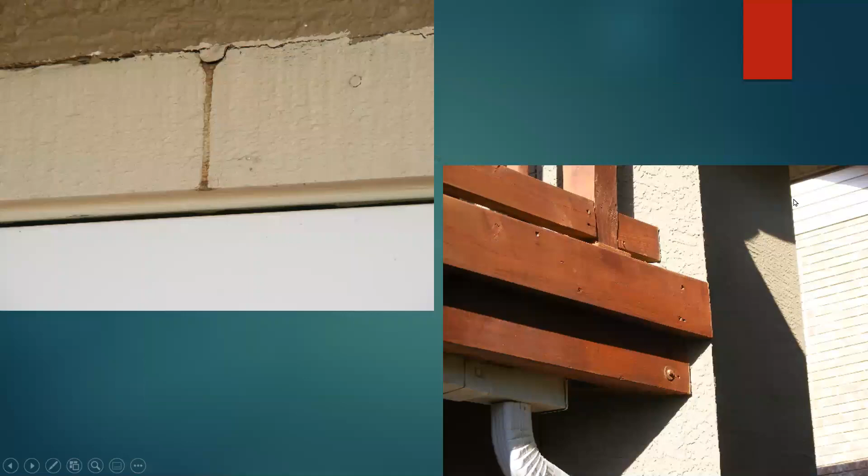It's probably rotted. Here is your lovely balcony. Here's your water stain coming out. Here's your stucco, no flashing. They just bolted this balcony up to this.

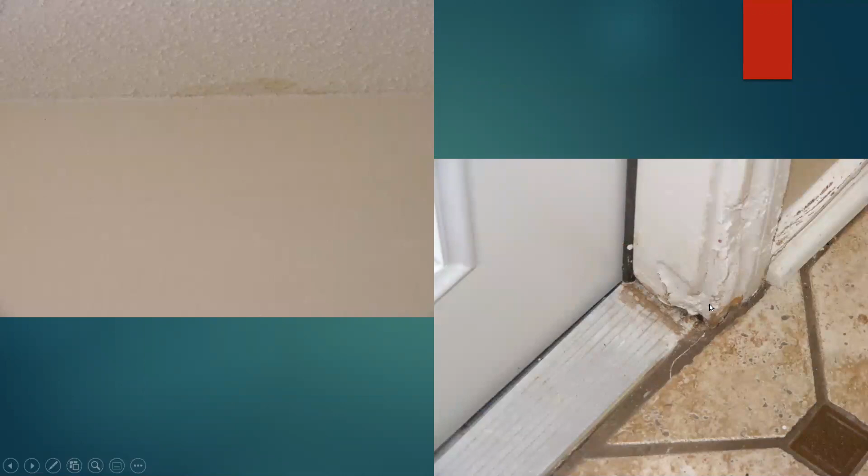Inside, they've caulked it real nice for my client and everything, where the door frame's rotted. You can see the water stains where that deck is connected. You can start to see the water damage along here. I'm telling you, it looks like you took these pictures from my house.

All kinds of damage here. And again, the water tracks up underneath there. We have to have a way to thermally expand and contract at the line.

Everything out there in the Dominion, all these rich neighborhoods, their HOA for the longest time required it. That's going to be my next big case: go after the HOA because they were demanding the builders do it this way. So even if the builder was smart enough and wanted to do it right, he was prevented from doing it right. Our HOA tells you to take it down to grade. Our HOA doesn't realize that there needs to be a break, and they will not let you repair it right either.

So I've got a few attorneys we're waiting on. We're going to, most of these HOAs have about $5 million. We're going to put it back on the HOA because they're forcing the builders and they're forcing the contractors to specifically do it wrong. You can't do it any other way, or the HOA in some of these expensive neighborhoods will threaten to sue you.

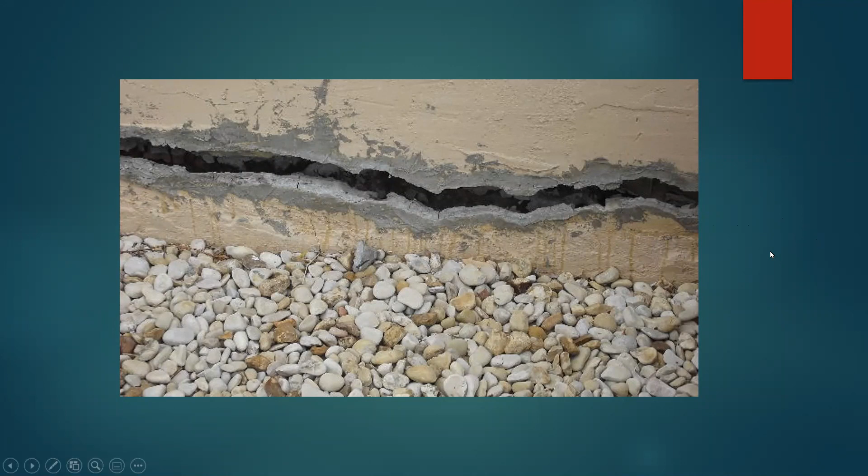This one here, the realtor is mad, never used me again. This here is 15 years old. They call me out for this, and the realtor's mad because I tell them all the stucco's bad. This is over the top of masonite. This is in San Antonio, west side of San Antonio.

It's got more problems even than that. You can see where water's just going underneath there, no thresholds. I mean, you name it. This has been redone numerous times. It looks like they probably had a trim board down here because the masonite rotted. They stuccoed over the top of all of it. That's one way to do it.

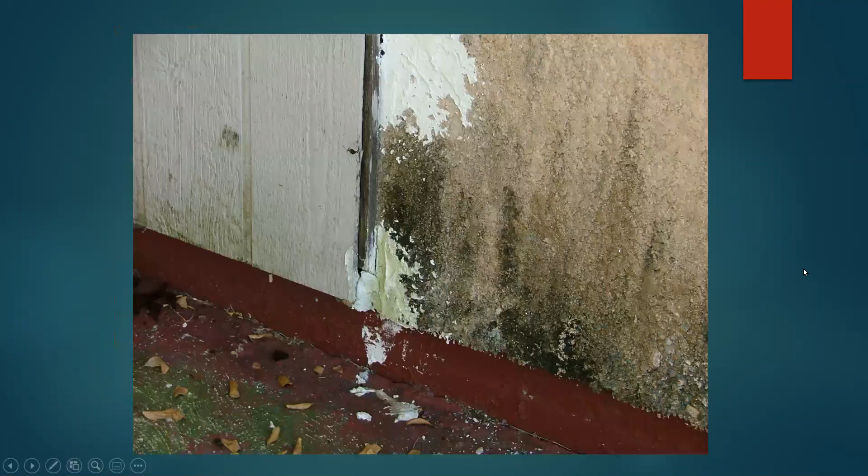This is the outside. Here is your masonite where they just stopped. You can see how badly damaged this is. I told them I couldn't inspect it. No, you just stay away from that.

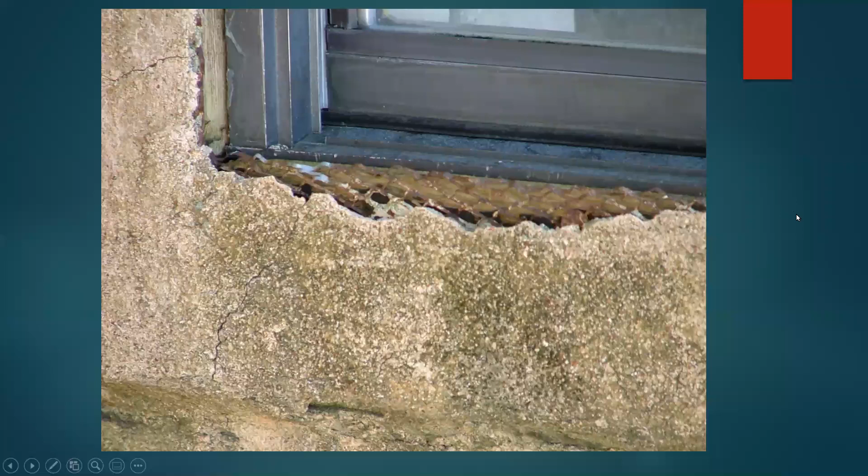So this is 25-year-old stucco at that time, but it didn't make it from day one because it was never done right. This here was a huge deal. This was a very politically connected gentleman.

This is out in Alpine, Texas, north of there, where it doesn't rain. But this particular year got 48 inches of rain. I zoomed in. This is actually from about 100 yards away. It's at his gate. He called me out there to look at this.

This story, a little bit more of my experience. I was an arbitrator here in court cases against home builders in Texas, and one of the few people without a law degree that presided over arbitration cases in Texas.

And so he called me out there. He lost in arbitration, lost $84,000. And when I got to the gate, he wanted to know if there's anything he could do. And I said, sir, I don't condone breaking the law, but the only thing that's going to save this house is gasoline and a match. And he said, you can tell this from the gate? I said, yes, sir, I can. And you're going to see what's happening here.

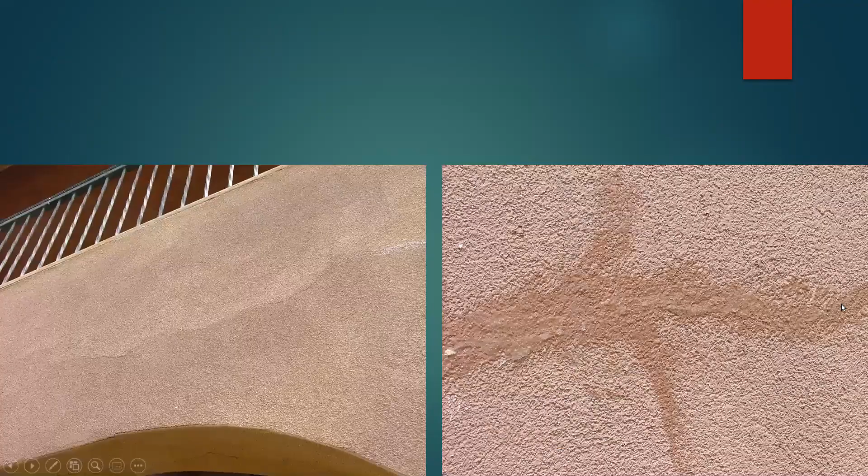These are all the cracks they've been repairing. This is bulging out. The water's gotten in at this balcony. But two things happened: water's gotten in, and this was done with very light foreign imported chicken wire, and it can't hold it.

These beams that they do are great. They look great, but you can't stop the water from here. If it's square, we could box it out with our casing beads, embedded caulk joints. I guess when there's a will there's a way, but this is just very difficult. They look cool, but the water wicks back into the wall with these beams.

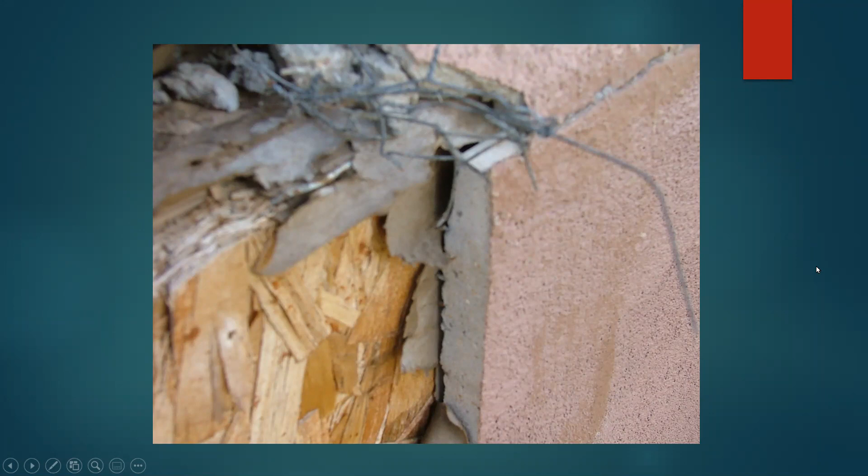This is water damage here. This doesn't do it justice. When we go to the other side, I'm going to show you how it does it justice. Okay, this is a door down here. The kitchen door led right out the back. There's your chicken wire, cannot hold, it's just cracked everywhere. Okay, here, your decorative band, they put all the holes in it, no flashing, water leaks in.

This is another door, water just leaking in. You can't stop this. We peeled the decorative band off. There's no way you can stop any water with this. It's impossible. I'm surprised this is not all screwed up here.

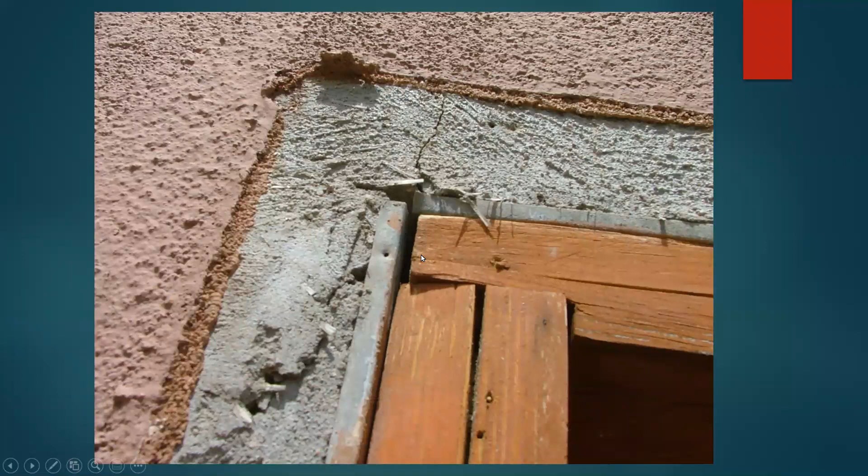This, again, is not the greatest. This is your door trim, the doors down below here. This is what's left of your door header. It's just gone. This is the back side. So the outside didn't look as bad as it did on the inside.

The mold was so bad in this house, it was unsafe to live in. This, again, was only just a few years old. And the guy lost in arbitration. It wasn't the builder's fault, surprisingly.

But the whole header is just completely gone. You can see there is nothing left of the header. There is over here, but there's nothing left of the header. The door is what was holding these studs up from the upstairs getting to the point of collapsing.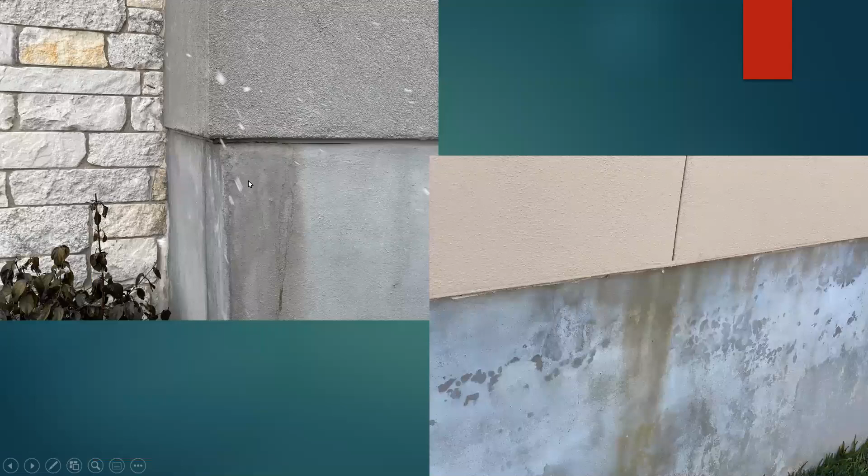Again, more moisture, okay? This is another house I got going right now. Currently, it's about $200,000 to repair it. It's just completely rotted out, an 8-year-old house.

You can see here, the builder says, okay, we'll tear it open, but if everything's fine, your client has to agree $5,000 to $8,000 per opening to put it back. And so the attorney did a lot of work with it. He said, are you sure, Jeff? I said, oh, I'm positive.

When they tore it open, this was the only indication, no water stains, no nothing inside, because the lady could hear it drip and she'd jump up out of bed and stay up all night with mops, sponges, and everything. So there was absolutely no water stains whatsoever, no water damage inside whatsoever. When they cut it open, she just started bawling. And she said, did you really know it was that bad? I said, sure I did. I would not have had you risk between $10,000 to $16,000 for 2 cuts into this house if not.

Here is the pedestal, okay, so we're getting this where we're creating a pedestal. So although we're not 2 inches off of here, you can see we are off the ground a little bit. Not much, but it's up just a little bit.

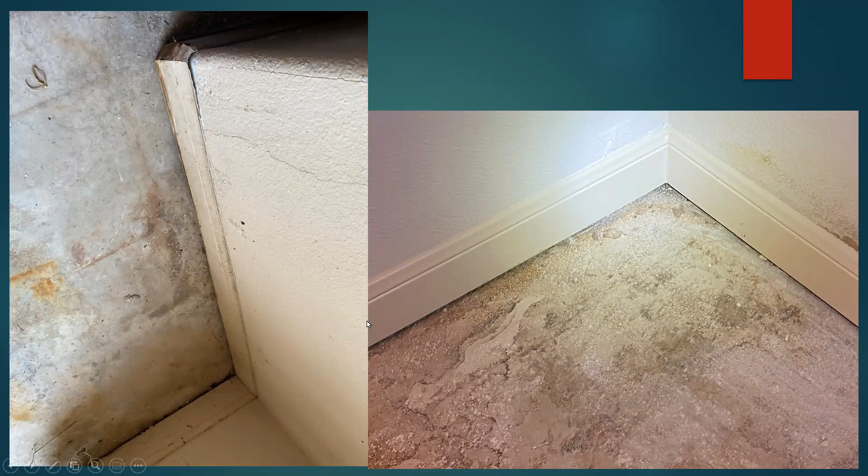This is another builder that got into a lot of legal trouble, and they called me. He's getting ready to do a remodel on this house. The home inspector missed it all.

This is leaking into the closet from the stucco. It's coming out right here. You can see the water stains. When the people moved in, there was a bucket of DampRid that they left in the closet for them.

This is another house. You can see the water stains that are flushing this out. They've recently redone all of this. This was all rusted.

It's actually one of my employees that was buying this house down at the coast, and he's going to have to redo it. But this is all freshly done. You can see the water stains. And here's what it looks like when you look up underneath there. It's just all completely rotted out.

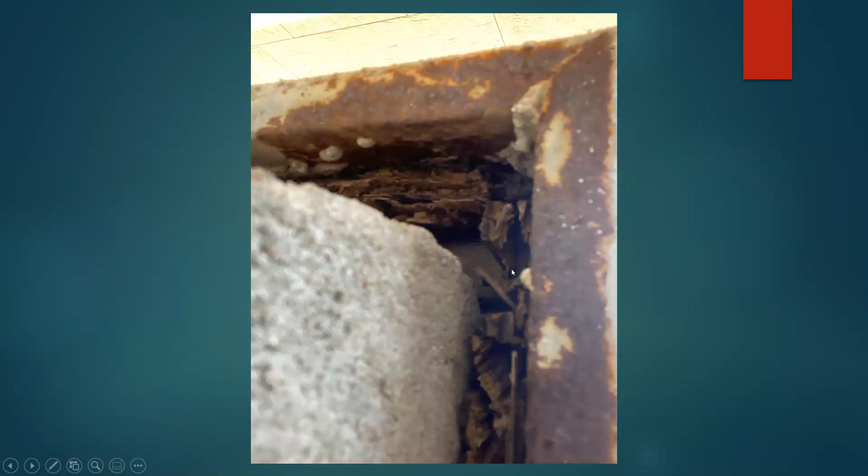Being down at the coast, obviously this is not going to work. This should have been stainless steel. You can't put this on there and expect it to last.

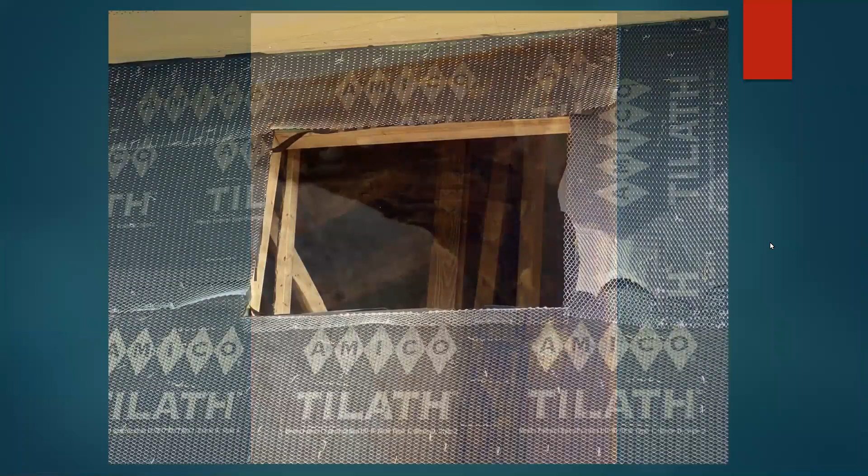Here's another reason why this doesn't work. They're going to lift this and try to put this window in here. How do you flash that? There's no sill flashing, no nothing. How do you do anything with this? You start over on that wall. But they don't - they're just going to stick it in there and caulk it.

Same builder as in some of the other photos. That's the builder that has 300 to 400 lawsuits coming their way.

This is a catastrophe waiting to happen. I was lucky - we had one stucco crew in Granbury, and they were actually pretty good. You didn't see this at all, ever.

It gets worse this time of year too, Jason, because the builders don't care whether you buy it or not. People are back to the stupidity, bidding $100,000 more than what a house is worth, and then financing that stupidity, spending $300,000 more than a house is worth, not including repairs and maintenance it's going to take. By the time it's said and done, they're $500,000 upside down on their stupidity. That's what killed us in the 08-09 time frame, and it's going to happen again.

We have to be careful. But the other thing is, this is just flat destroying people's lives. This is not like a piece of James Hardie siding - I had one yesterday that did this kind of crap, and I said, okay, this isn't going to break the bank, we need to replace 3-4 pieces of Hardie siding. No big deal.

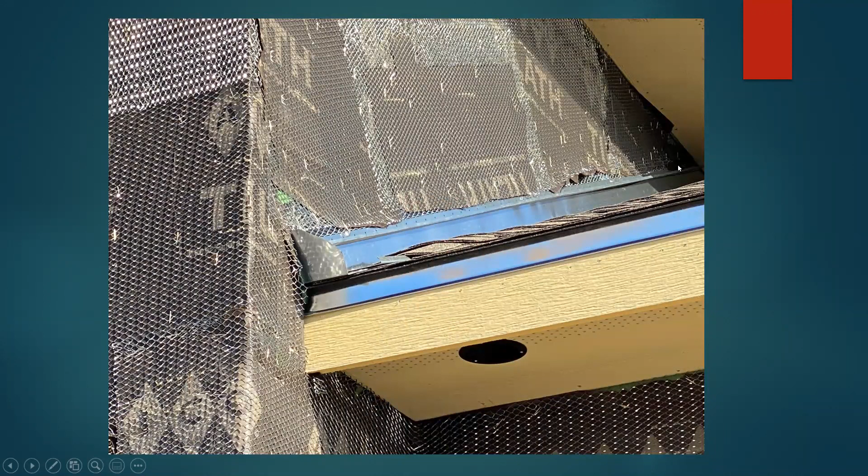Again, we're using our flashing here, we're just kind of stopping it. I don't know how they're going to finish this off. My guess is they're just going to take the stucco right down to the roof here. I don't know what the hell they're going to do here. This is just not going to work.

We don't have a weep screed. We don't have any bond breaks. The moisture is going to track up into here.

This is another big issue you see. This fascia has to be cut short, and we have to run the moisture barrier behind here. They never do it, and this is a place that always rots out. You have to cut this fascia short and run this moisture barrier back behind here to stop that from happening, as a one-piece moisture barrier detail.

At least they got some kick-out flashing. Hey, they did something right. Yeah, they did. Again, we're not overhanging.

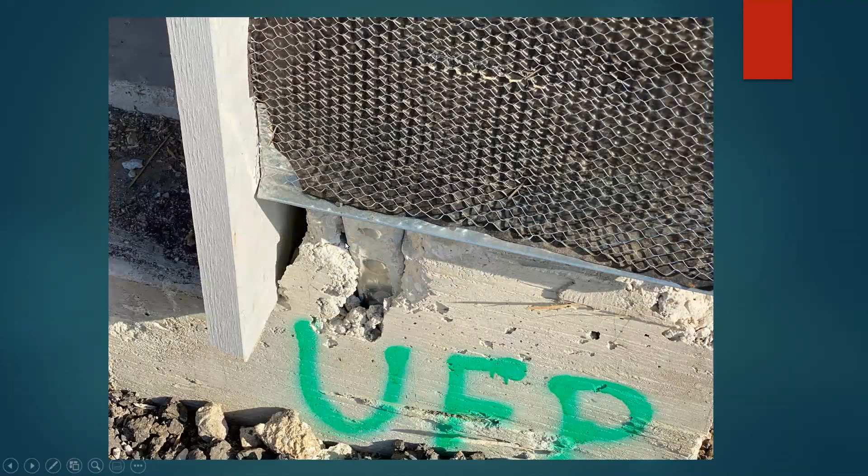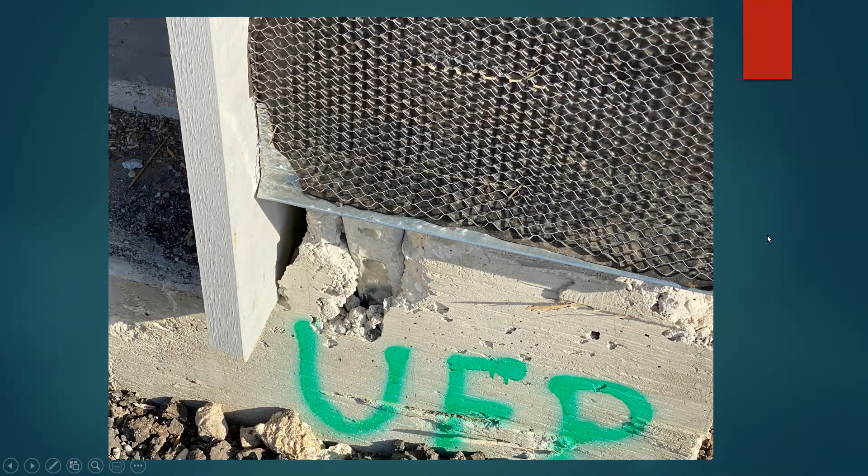None of this is flashed. You're not going to stop this water here whatsoever. But they also put the staples in here really low. The water's just going to leak in around this. No care or regard to anything.

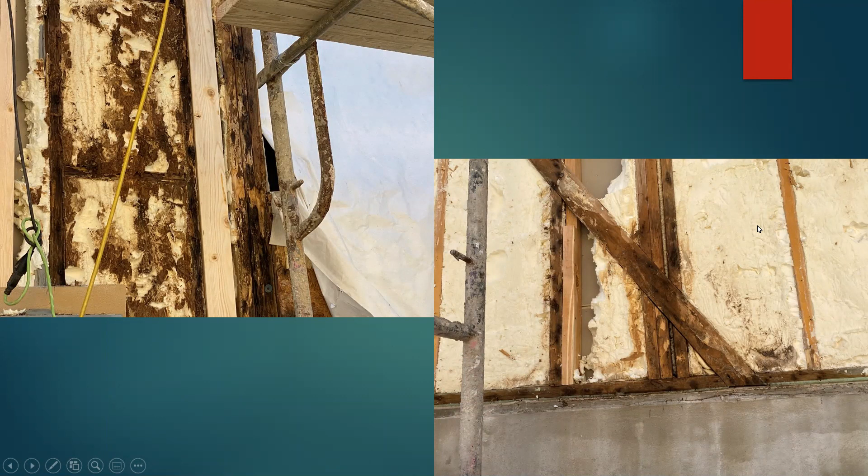You can see what it starts looking like, and then you tear it apart and it was all rotted back in behind there.

The same builder threw these windows in. This is how they flashed it, then they just stuccoed over it because the stucco wasn't ready. These were put in with no moisture barrier. They came back and put the moisture barrier on over this afterwards because builder's first source did this—the builder wasn't ready and they wanted to install the windows, so they just put a little bit of stuff around here.

This was what they did. Now, this theoretically could have worked if they had lifted all the stuff back up and tucked it in there and didn't shingle over it. But why? Why? Just coordinate things right.

Again, more pictures, more—all the same house, you know, just completely failed.

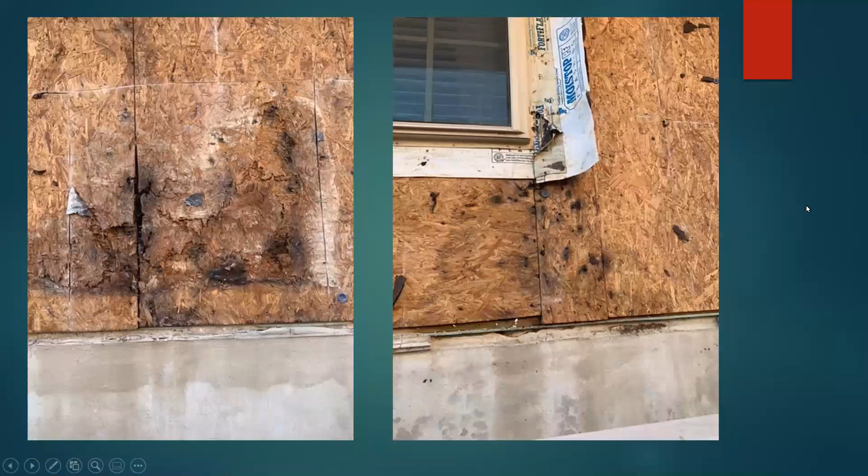This is what it looks like from a distance when you start tearing it apart. This header's just completely rotted out. This is where it started to drop—really, really bad. So we didn't just have a stucco problem.

Again, because they weren't ready, they put all this on first and then put it on top, so we were forcing water from here behind here as well. No flashings, nothing—so we had leaks here, leaks here, leaks here. Everything leaked.

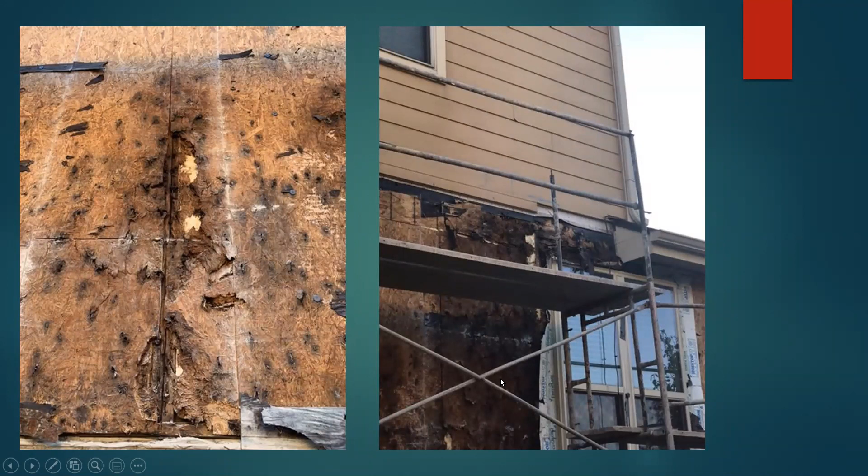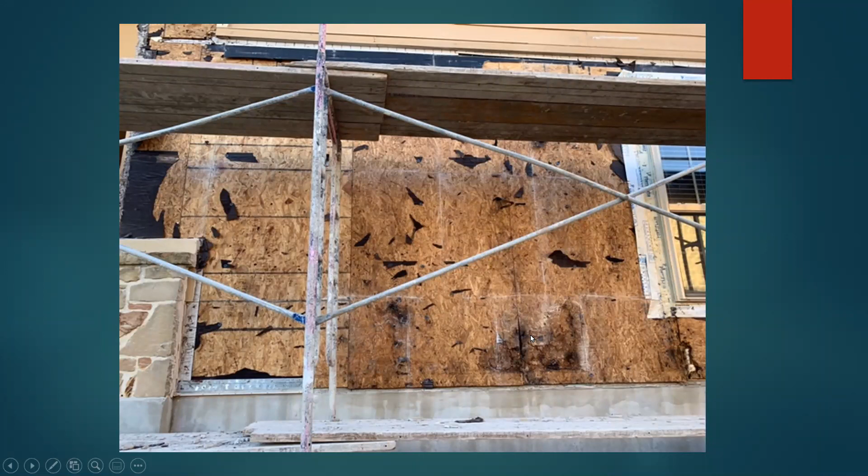More of the same house, same details—I've got quite a few of those. Once you tore this open, you saw what it looked like with the spray foam. I should probably change how these are, because once you tore it open, you saw how rotted the studs were in there. This is not just rot—they tried to claim this was just a little bit of rot on the surface here.

Absolutely was not. This is actually a case where I'm defending the builder. This is the only evidence—I don't know if y'all can tell what's wrong here. So what they ended up doing, this is the only window I found because I went back and did some more destructive testing. The expert on the other side found that it's flashed—here's your head flashings. I've worked with this builder and he's been making lots of changes through the years. I actually like them.

They ran out of lick-and-stick and used some DuPont tape on the waxy coating on the gyp board here, and so this is wrong. It's not leaking or anything, but it's wrong, so it's going to have to be torn out. The builder's agreeing to do it. The other side, I don't think, is being reasonable on what they're expecting.

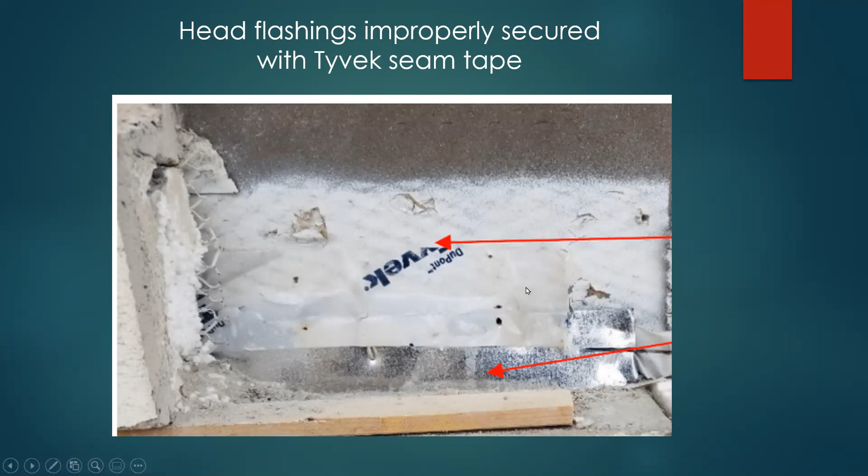Awesome. I don't know where we set time-wise. We didn't do half bad, so now we've got some time for any questions anybody has.

Well, there's a couple of things. One of the issues when you start looking at zip and stuff like that, or LP, is that the backside of that cannot be touching the concrete. So it depends on what kind of sheathing it is. If we're just talking about OSB, it does not have to overhang—as a matter of fact, I don't know that I would want my OSB to overhang. It's going to be hard to judge where to nail in from my weep screed and other stuff.

My weep screed, when installed properly, is going to give me that 1.5 to 2 inch overhang, so we're going to get the overhang we need, and that's really where it's at. If we overhang the sheathing, it's going to be hard to nail it in like we should, and I would not recommend overhanging that sheathing theoretically. The zip board, I think, really should overhang a little bit—it's something I've talked with Mark about. It's designed that way; their product is designed to have the butyl rubber flashing details that they have.